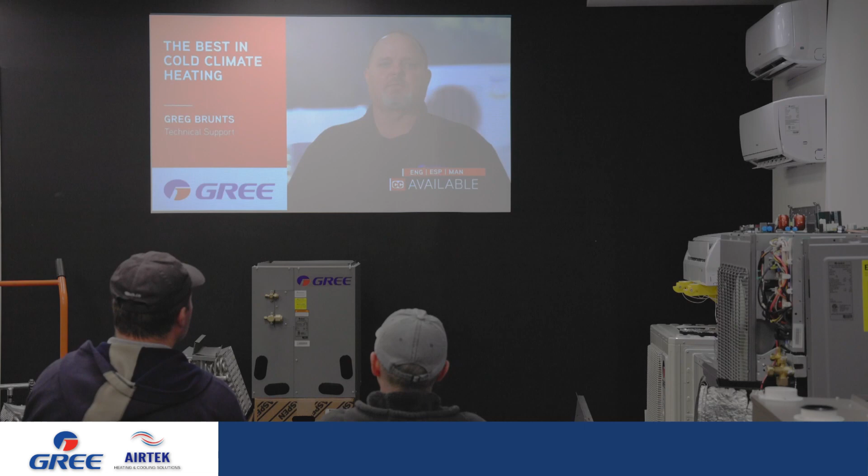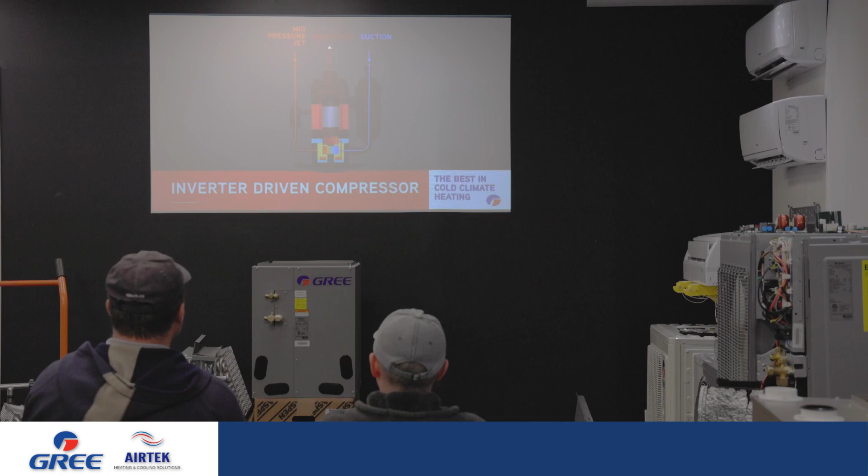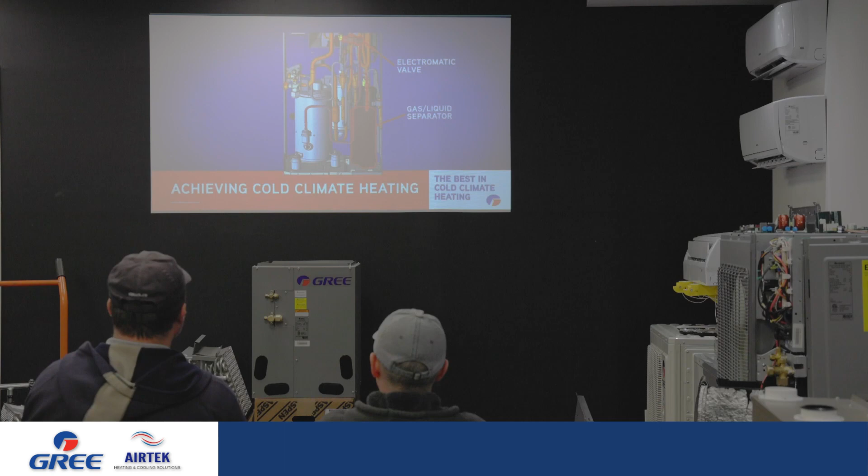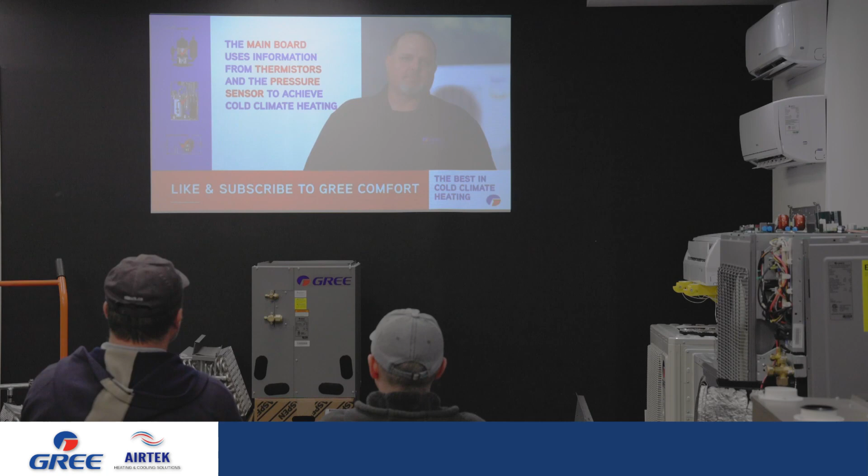Hello, Greg Brunts with Gree. Simply the best in cold climate heat. That's because Gree Flex and Multi-Pro use Ultra Heat technology that makes the unit a true cold climate heat pump. These units use a two-stage, two-cylinder enhanced vapor injection compressor that allows these units to heat effectively down to minus 22 degrees Fahrenheit. Gree Ultra units can go as low as minus 35 degrees Fahrenheit. The Ultra Heat compressor is a three-pipe compressor: a suction inlet, mid-pressure jet, and your discharge. A gas liquid separator and the electromagnetic valve allow refrigerant to flow into the mid-pressure jet of the compressor. In cold climate heating, the valve opens and refrigerant flows from the top of the gas liquid separator into the high-pressure cylinder, compressing the refrigerant a second time and increasing the discharge gas temperature. And this is what makes Gree simply the best in cold climate heating. With Gree, they're by your side.

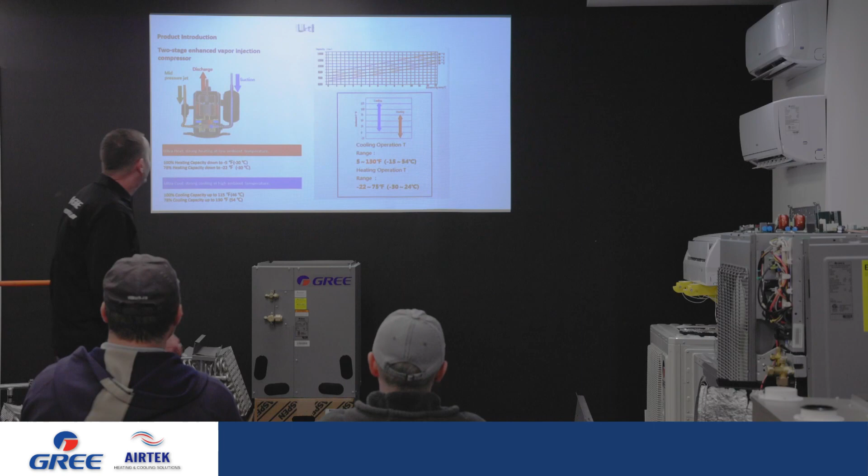So that's how our unit's small and compact. I don't know if you've worked with any other brands, but they're significantly larger, and on a cold day, they can get very, very noisy. Now, today we'll focus on our outdoor unit, whether it be 1.5 to 3 ton or 3.5 to 5 ton, matched with an indoor furnace with either our Gree coil or our Aspen coil.

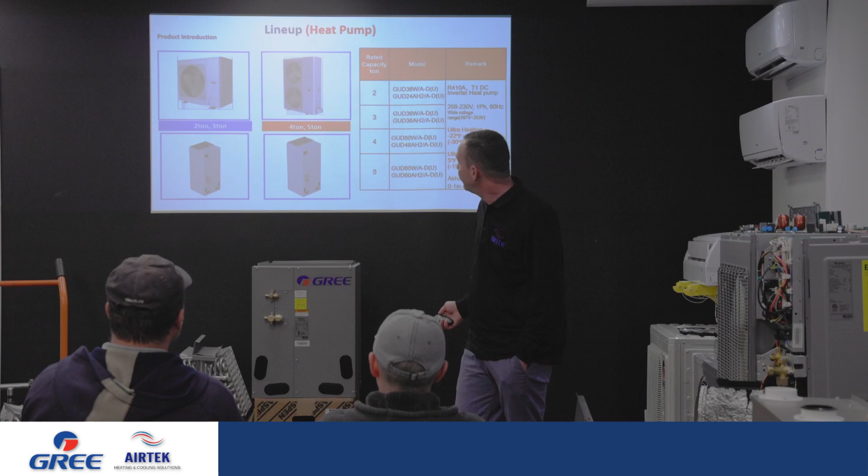Okay. Now the unit should be very quiet, as you see here, 2 to 3-ton, 52 decibels, my 5-ton model 58. This rings true all summer long, right through. It's just in the winter months that we might get a little louder than this, and that's during a defrost cycle.

So I'll say it a few times, but we would recommend to use a stand, not put the unit on wall brackets. Again, it's a very quiet unit, but on a cold day in the winter, there's going to be a handful of days that the customer won't appreciate that when the unit's going back and forth in defrost. So whenever you can put it on a stand, do so. Stay away from wall brackets.

Okay, our case coil here, really nice case coil. It's made to fit, this is my 1.5 to 3 ton right here. It's made to fit right on top of a Lennox 70, an American Standard, or a Trane.

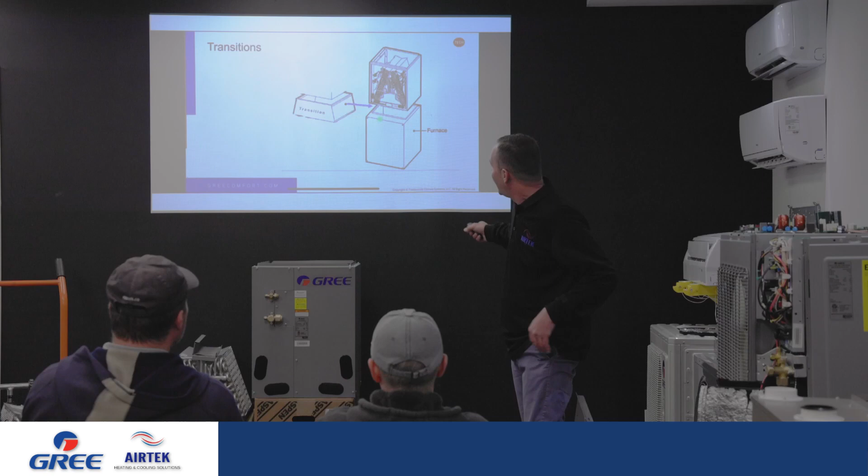60 to 80,000. We would like to see a transition, 8 to 10 inches ideally. If we were doing this, not only would we have more air for the heat to dissipate through the coil when the furnace is on, we'll also have an access point to inspect and clean the coil. We strongly recommend that. We do want to see some space between that coil and the furnace.

Do you sell them? Sorry, we do not. I'm looking for one. There was one recently on LinkedIn that had a built-in access door and everything, so I'm going to bring that to my boss's attention because I thought it was amazing. It was pre-made, heavy enough, solid enough metal to sit that coil on nicely. So I am looking for that, but in the meantime, try and make some type of a transition. I know it's an exact fit in a lot of cases, but we do want 8 to 10 inches.

Now, we need 5/16 access valves. I think that kind of rings true with just about any heat pump these days. We've been using them for ductless units for several years now.

What's nice about the Gree coil is I've got valves on the coil, the same valves as I have on the unit. So if we wanted to do our vacuum or anything of that nature, we can do everything in the basement where it's warm and dry.

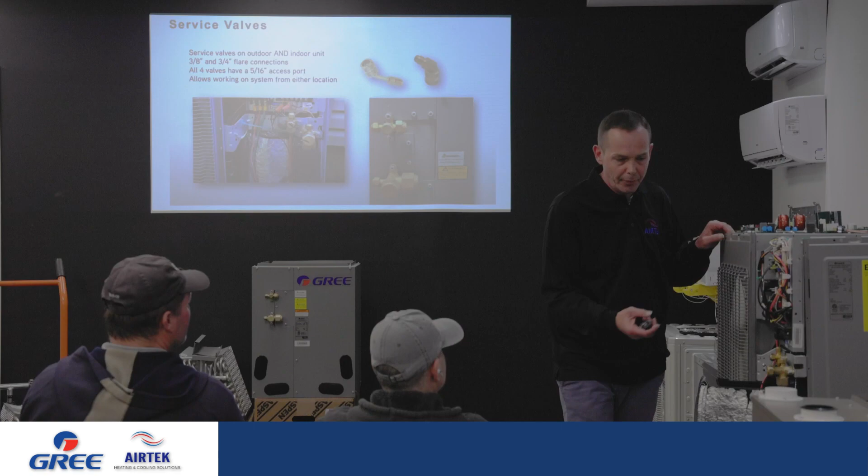So a complaint I get quite often on this unit, I really believe this is the best money can buy right now, but there are a few complaints I have as well. One, when I hook up my low voltage here, it's hard or impossible to hook my gauges up properly.

So one thing I learned from YouTube on it is if you unscrew these two screws here and pull them right out, you can actually move this out and connect your gauges. So that's one little secret. At the same time, another tip is just move inside. You've got all the same ports and access inside, so we can do everything inside we can do outside. Keep that in mind.

Now, we claim the Gree coil is multi-position. It is and it isn't. It can go horizontal left and right, and it can go upflow. For a downflow application, the Aspen is approved for downflow.

So I don't know if anybody installed an Aspen coil, but the 2 sheets of metal in the bottom of the box, we just chuck them in the garbage normally. Those are for downflow applications. Those 2 strips of metal go on either side of the coil in the pan, and what they are is splash guards ultimately. One will sit on each side, it's just a splash guard. We can do downflow applications with the Aspen coil, it's approved for that.

Well, this would work, but it doesn't have the approval, so if we were doing a downflow, I'd strongly suggest we use the Aspen simply because it has the approval rating for downflow.

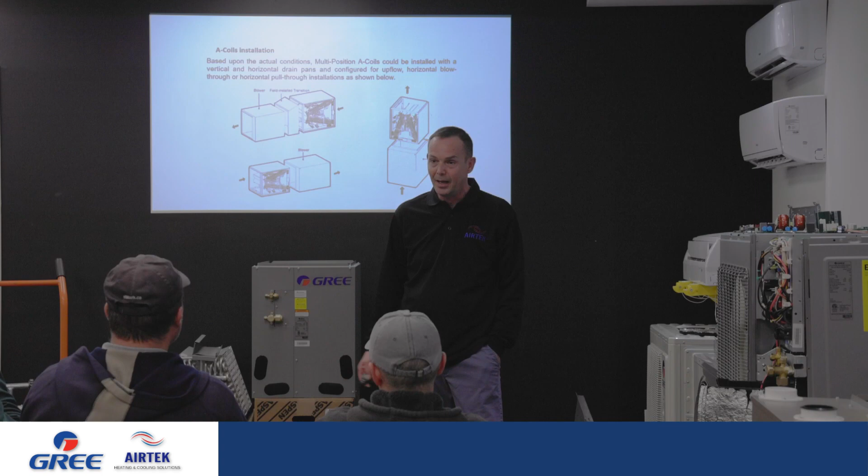We'd ask you to go out and look at it. If you do see it's defective, take a picture. We'll give you a pan and we'll set you up. Again, we've only seen 2 to date, but proactively we thought it better be safe than sorry, so we can keep everyone happy.

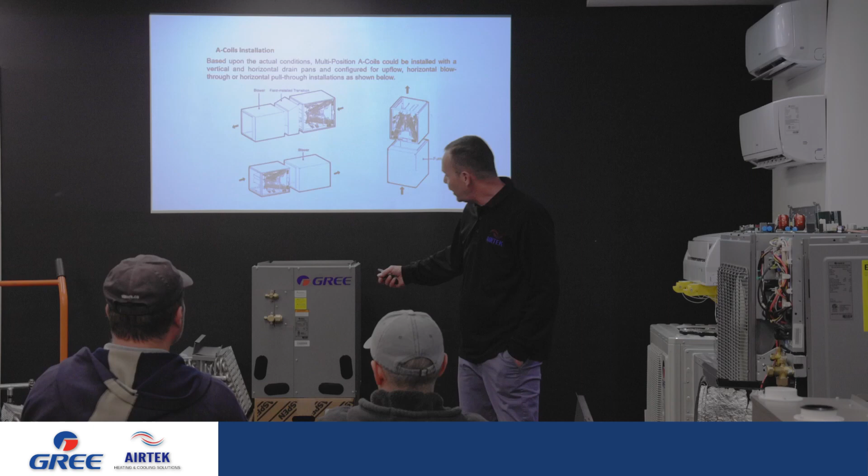Again, before you leave, at the end we'll actually take the pan out of this and swap it for a black one, and you'll see it's really not difficult to do. I've done 3 in place, meaning the gas was connected. I didn't relieve any gas, I did it in place. So we'll show you how to do that.

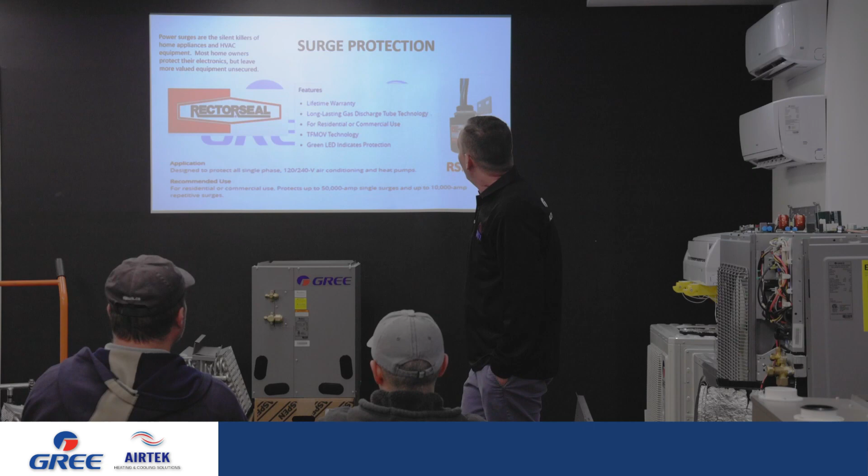A little on surge protectors here. We believe in surge protectors. Based on my data, I've shown it to my boss and the tech team, and we truly believe in these. When you buy a new TV, they generally sell you on a power bar with a built-in surge protector. We find that these really protect our unit, so when lightning strikes, this gets the brunt of it, not my unit.

Has anybody ever seen wires melted from the disconnect box, or from the compressor, from the unit right to the compressor? If one of these was on there, it wouldn't happen. Ants get into disconnect boxes, you get an ant across both line 1 and line 2, and we get too much voltage and the component fries.

This is sacrificial, it's about $90. We believe in it so much we're almost ready to add another year to the warranty. Our warranty is 10 years when you register and buy the unit from Airtek. If your compressor fails in that period, we give you a new unit.

Now let's get into that a little bit. That's assuming you install it properly. So today we'll go over it - it requires a 3/4 line set, so 3/4 or larger would be okay. But if we went out and looked at it and you had a 5/8, or if you didn't use number 10 wire, you skimped on the wire and it wasn't to code, then ultimately we would only give you a compressor. But if you've done everything properly and you have a compressor failure, we give you a brand new unit.

A lot of people say that, we actually do it. But again, we do believe in these, and they're not hard to install. I'll just quickly show you.

This one in particular, if you use a different one, you want to look at the instructions, but this is very easy to install. We have our line come from the box to a line, and from here we go to load, so we just connect to our load. So right where we're going from the disconnect box to the unit, we connect the same way.

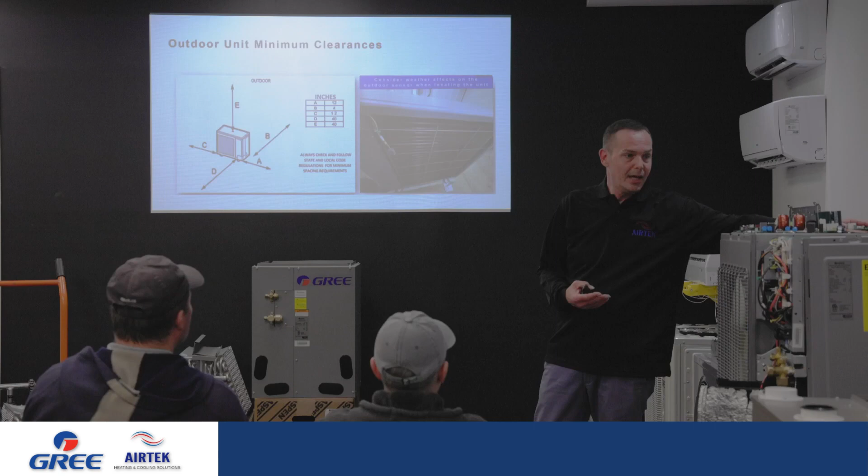Just keep in mind if you're doing that, we want to be able to get a hose behind the unit to clean it. A foot on either side - a foot is really important over here if we ever wanted to inspect a reversing valve.

There's a door here. This door comes right off, so we want a foot of clearance here, 100%. Out the front, we need 40 inches.

Be wary of chain link fences. In the summer they're fine, but I have seen chain link fences turn into ice. Remember, this is cold air and water that's blowing. Depending on how close it is, I'm not a scientist by any means, but I have seen them freeze up, so just be careful of chain link fences.

40 inches is what we want to see for clearance. Now, if 2 of these units were together, it's a 12-speed motor, so if they were too close, one could ultimately burn the other one out on the first speed. So 40 inches is important.

Now, we're working on getting baffles. For example, if you were putting this on a roof, I'd like to see you use a baffle. I'd like to see the wind hit the coil side, not the fan side, so do a little research. We put a baffle on, or I'd suggest putting one on, if I couldn't make the clearance—maybe there was too narrow of a townhouse complex. I haven't seen one that narrow yet, but it's possible. What it does is it reduces the clearance needed.

The 4 screws come off the existing grill. The new grill has a flat front and is open at the bottom and top, so it's redirecting the air. We don't want to say no, we can do that.

Above the unit, surprisingly, they want 40 inches. I don't know why—I've changed every component with 18 inches above, and most everything comes out here anyway. But keep in mind, if you're putting it under a deck, it won't affect operation, but the code or instruction manual says 40 inches above. I'm just putting that out there.

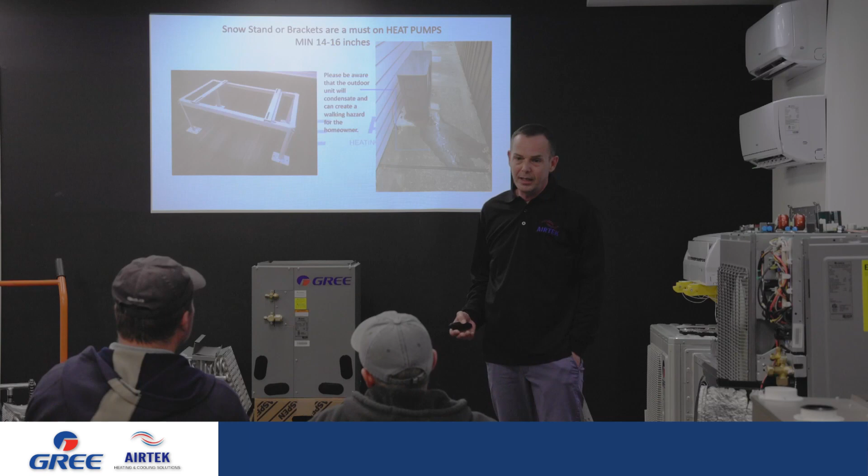All right, stands. Stands are really, really important, again, for noise especially. We'll get into line set lengths and what we've learned over the last year on how to make the unit quieter and keep it within the decibel rating it should be. But I can't stress enough, put it on a stand.

There's going to be a handful of days in the winter when it's on defrost that the unit can get a little louder than it should—not necessarily should, but it's working, and it's very cold outside. Mine at home in December and January was making some noise during defrost. It's quiet again now. On those cold days, it will happen.

The units condensate, and this one's not on a stand. That's not really why I'm showing you the picture—I'm showing you the picture to show you the amount of condensate here, so much so that I couldn't service my unit at home in the wintertime.

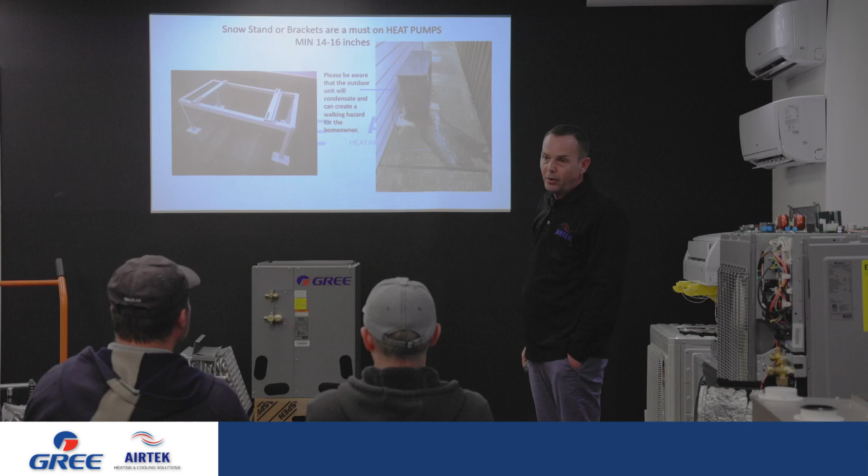That's normal operation. So if a unit's at the front of somebody's house, you might want to tell them, hey, this is not an air conditioner, it's going to work year-round, and somebody's going to slip and fall. I would go as far as writing on my invoice if they didn't want to move it: this is a possible slip and fall hazard, customer to make revisions. Just tell them about it at least, and if they don't move it, they don't believe you.

I'm going to show you how to do a pump down shortly, so we can do a pump down in the summertime and charge, and we'll move it to the backyard. There's always money to be made.

As far as power into the unit, there aren't too many people here, I can have you come up. I'll pass the boards around first here anyway. This is my main control board here, so here's where I'm going to see fault codes. I'll just pass that around instead of pointing at the unit itself. Power comes into the unit just below the main board—you would assume that it's feeding the main board.

It's not. What happens is this board here cleans and filters the power and converts it to DC. That board's actually placed right behind the main board. So again, it's not feeding the main board—it gets cleaned and filtered, then it goes to our drive board. This board here, all its duty is to control the compressor. We'll get into it after. When we're changing this board, thermal paste is required, and there are 4 screws that have to be properly inserted and tightened. We can't leave one screw out, otherwise we'll get a fault code on this, even if we just changed it.

I'll get more into detail shortly, but that's our drive board. All that does is control the compressor.

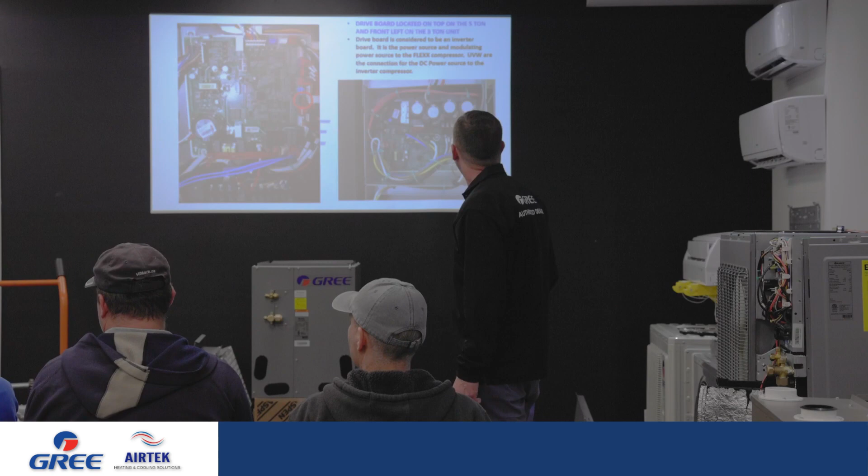Okay, forced operation. We're in the process of hooking this up. By the next time you come out, we should have this ready to go. We're going to have some guys come by in the next week or two, pipe it, and then we'll be able to power it up and physically show you on the control board.

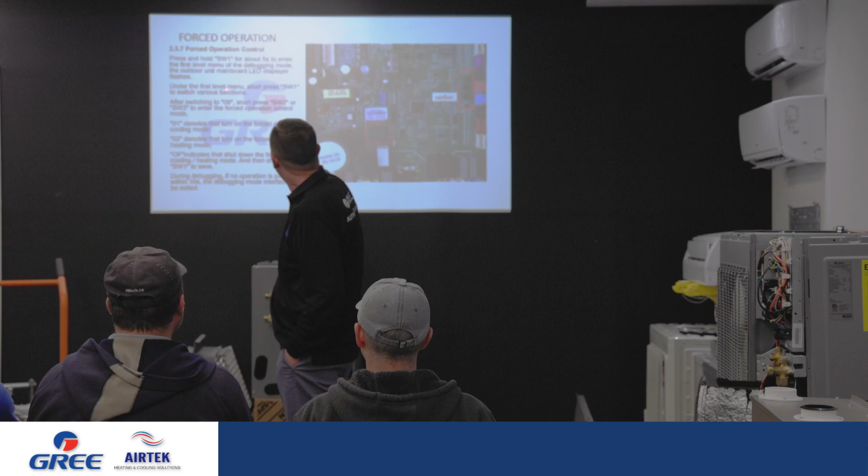So we don't have a contactor, but we can do more than we could have done when we did have one. Through these 3 buttons, 1, 2, 3 - 1 is at the bottom, 3 is at the top - we can get into cooling or heating mode. I'll walk you right through pump down, it seems to be the most popular.

So again, this is where, let's say we had a leak, or they didn't like the location of the unit, we can do pump down. We don't have to pull the contactor in, there isn't one. Cooling mode you can try, but you might go off on low pressure, so you may not get all the gas. This is the best way to do it, okay? It's just like holding in the contactor like we used to.

So through these 3 buttons, we're going to press and hold switch 1 for several seconds. Ultimately this is going to start to flash, and you're going to go through until you see 08. Once you see 08, you can hit switch 2 or 3 to enter pump down mode. Then we hit switch 1, and the unit's going to come on in pump down mode.

What I'd ask you to do at that point is, it's not magic, we have to manually shut our 3/8 valve. You can either hook your gauges up, or I'm able to go off sound, either way. Once all the gas gets back to the compressor, just like we used to, we're going to close off the other valve.

Okay? At that point, in all honesty, I'm gonna ask you to turn the power off so the system shuts down. Okay, I don't have any other instruction on how to shut it off, so truthfully, just turn the power off, we can turn it back on again once it's moved. So you can actually just hit the SW2 or 3 back to the off position.

Will it? Okay, very good. So I couldn't get that far. I've done one, but I couldn't get it to shut off, so thank you. So instead of shutting the power off, you can actually go back into the menu. Thank you, buddy, it's good having you here. And hit switch 2 or 3, and you can get back in. And then you just go to the off. As long as you leave it there, it'll turn off. Very good. Or just hit the power off, either one. Very good.

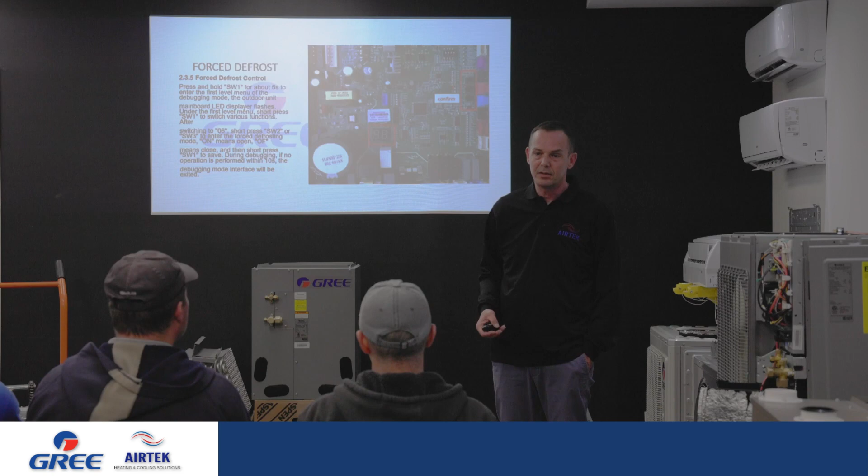It lasts 2 to 3 minutes. And it doesn't affect the thermostat even a half degree. So it's very minimal and it's not cold air. So I would say don't worry about it. I'll talk about it again when we get to the wiring, but I wouldn't worry about running an extra wire for defrost. It's not necessary. Again, it's ineffective when you think about how long the furnace takes to kick on, and defrost only being 3 minutes, you're doing it in vain.

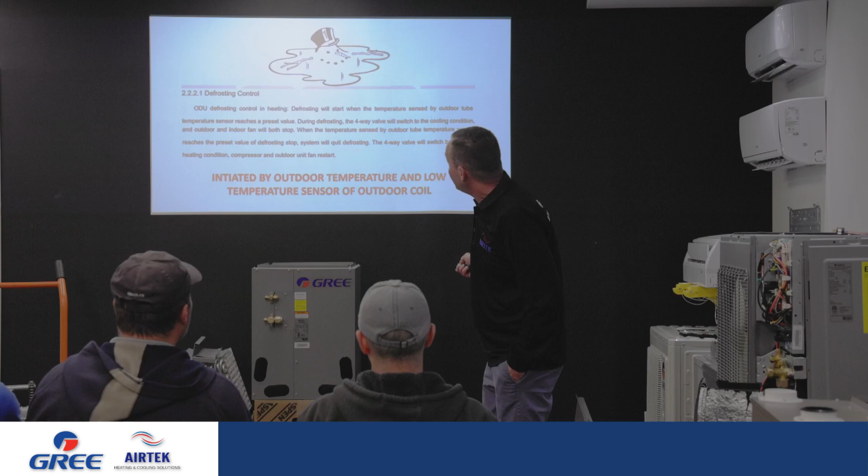So defrost, again, it's not controlled by the thermostat, it's not controlled by a timer, it's done in real time on this machine, which is pretty cool. So there's 4 sensors. There's a heat exchanger temperature sensor, our outdoor sensor. This one is the one I showed you in the picture at the beginning where they had the vent pointed right at it. We want to be at least a foot away with our venting. Dryer vents as well in the back, a foot would be okay, but 3 feet would be ideal.

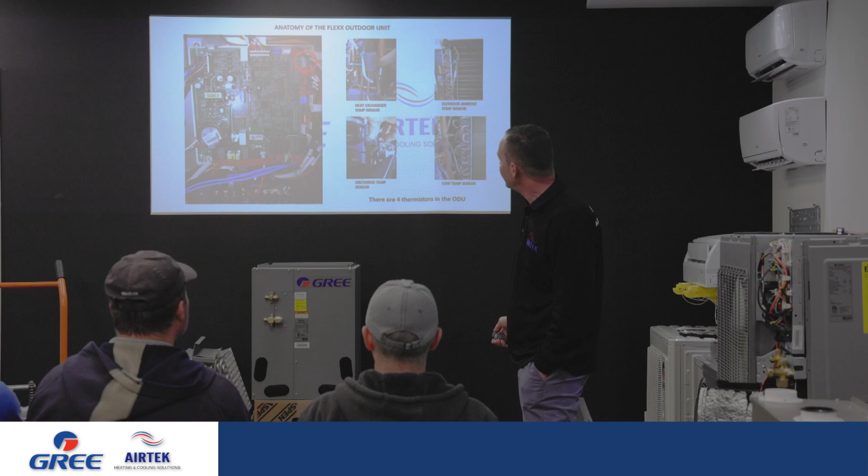If we had a dryer vent back there, when you walk by in the winter, all the snow's melted, it could cause issues with defrost, especially if it's at the rear of the unit, my sensor's right in the back. So try to stay 3 feet away from a dryer. Discharge temperature sensor, a low temperature sensor. So there's 4 in total. What's really cool is I've only ever seen one fail. And I got either an F2, an F3, or an F4 code.

Okay, so F2, in case you can't see, is condenser temperature sensor error. F3 is outdoor ambient temperature sensor error. F4 is the discharge temperature sensor error. One of those sensors failed, so it gave me a code for which one had failed. However, my replacement part has got 3 all on one sensor. So it's one harness and all 3 connect to it. So it's kind of cool. When I see an F2, 3, or 4, it's very accurate. One of those sensors has failed. Again, I've only seen this happen once.

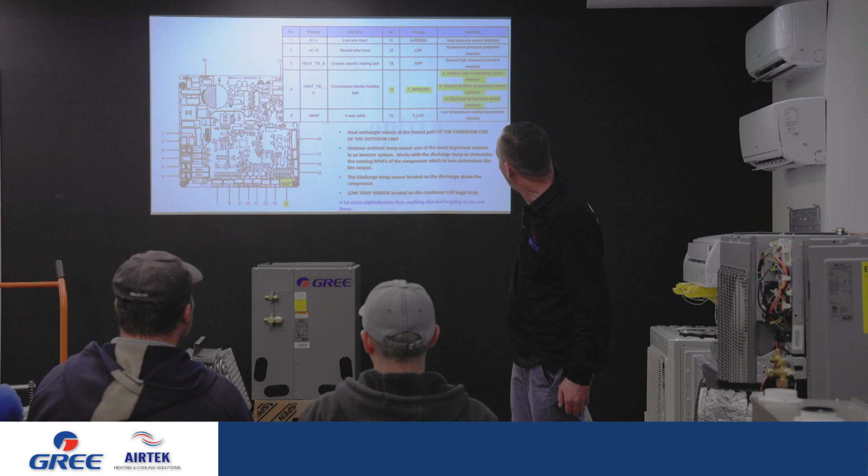Well, if it does fail, we could either take it off. So the plug, this is out of my service manual, by the way. I'm going to send this to everybody. But here I'm able to say it's number 14. Sensor right there. 2, 3, 4, I know exactly which sensors they are. So that is right here on the board.

Right at the top here. So we could either take that out, ohm it out. We only have to find a problem with one of them. Again, they're all together on one harness, so it's a fairly easy fix. We'll pull that off, and there's maybe 6 tie wraps, unfortunately. We have to go through and run each wire back again, but it's a simple fix.

Has anybody installed any of these and had any problems at all? Okay, same thing, but what kind of problems have you experienced, out of curiosity? We're getting into line sets and noise, so we're getting there, but I'd be interested. First time I installed it, I forgot to open the valves. Okay, did you get an H4 code? Did you get a code? Did an H4 overload?

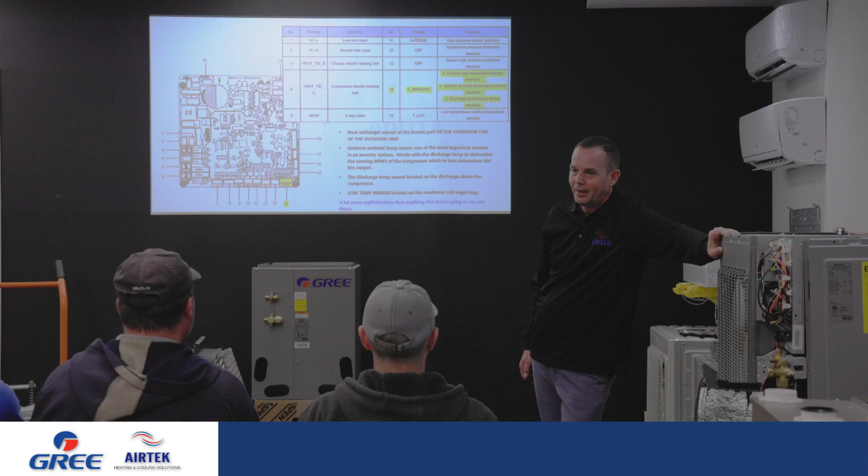There was low pressure. Okay, E3, that would be E3. So when you found it low pressure, you kept adding gas and then found out that you had one of the valves closed? I had like 50 grams, the same, low pressure. What's going on? I added a little more, nothing changed, and I went inside. Valves were closed. Right, okay, well, good, at least you figured it out.

Very good. Okay, something really cool about this unit, and it does set us apart from our competitors: we don't have to insulate the 3/8. The reason for that is I've got a TX valve in the unit, and I've got another TX valve on my coil. So we have total control. A lot of our competitors don't have that.

So much so I had a guy installing a unit across the street from a lady, and she had a different brand that had to be insulated. I had to send them a picture of this so that she could comprehend that it didn't have to be done. So this is a big deal for me because now I can reuse line sets. I don't have to fight insulation in the ceiling, and I don't have to insulate it. So that's a selling feature for us as the installer and the serviceman.

What's really cool as well is 1.5 to 3 ton, 3.5 to 5 ton, it doesn't matter. It's 3/8, 3/4 for up to 100 feet of line set. We don't have to increase pipe size. I've installed 5 tons before that were 1 1/8. You couldn't bend it, you had to buy elbows. You couldn't bend it without kinking it. It was a disaster. It cost me a fortune. It was a nightmare. I can run 3/4 for 100 feet with this machine.

Really nice. Now, when we add gas, this is a little different than an air conditioner. We can't gas and go off pressures, okay? It's really off of the charge. The unit comes pre-charged with 25 feet. If you use an Aspen coil, it's just nitrogen. But if you buy the unit, 25 feet's in here, my case coil has another 6 feet. So now I've got a 31-foot charge. In actuality, you'll get away with 35 feet. So after 35 feet, we need a scale, and we need to weigh 0.32 ounces in.

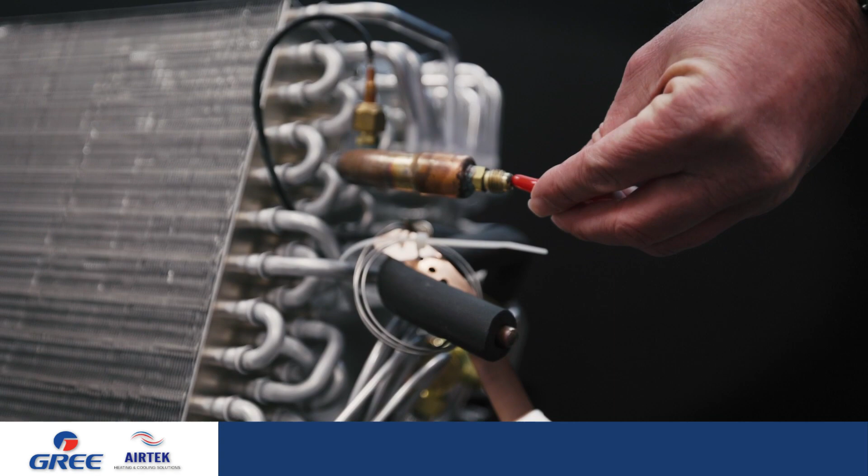Okay, so you say there's nitrogen inside? No, there's no R410 refrigerant in here. There's nitrogen in here. So if you ever buy one of these coils, and I will say, if everybody's familiar with the hiss test, when you buy an Aspen coil from us, just pull off this little tab here and push the Schrader. You should hear a good charge of gas. If you don't hear any gas, or if you don't think it's enough gas, you can return it to us, no question. So I'd say do that before you even leave. We'd rather see you do it once and do it right than come back with a leaky coil. It doesn't help anybody involved.

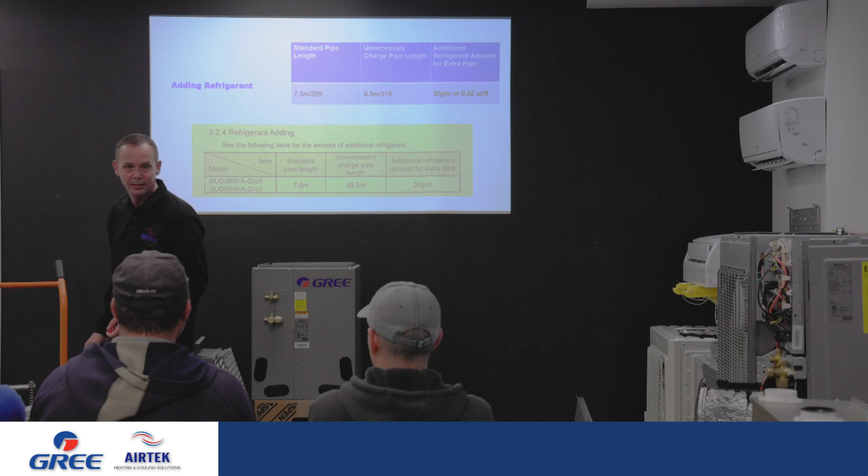Okay, so again, I can't stress enough. We'll get into it more when we get into more service stuff or fault codes. You need a scale and you need a reclaim tank. It's very important. We can't go off pressures. I had a guy last week, he was at a job and he had the H4 code. I tell him to take 5 ounces out, and he says, I don't have a scale, I don't have a reclaim tank. So I didn't encourage it, but he's got his hose there and he's asking me, well, how long do you think 5 ounces is?

I'm saying, holy shit. That wasn't a good thing what he did. It was wrong on many levels, but here's the kicker. He doesn't know what he took out now. So come next season, he may have screwed the charge. You know what I'm saying? Weight is very, very important here. For example, if you had a leak and it was a large enough leak, we can't go by pressures. I'd tell you, all right, let's take all the gas out, let's weigh it all back in again. It's that critical with this. So everybody needs a reclaim tank and a scale. It's part of our job now.

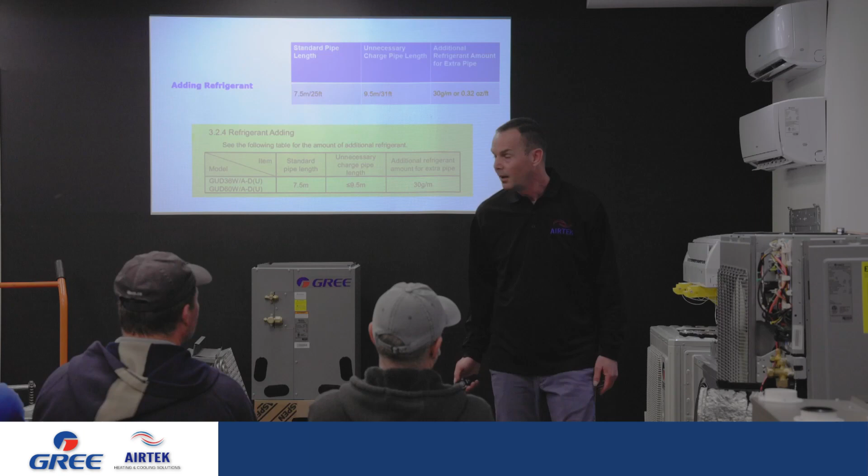Now, with all the new gas coming, this kind of works too. Everybody's starting to become afraid to weld with the new gas that's flammable. Thankfully, we're not there yet with our unit, but it's coming. So we sell a 3/4 copper flexible connection off the top here. It's about $40. These are what I wanted to show you. These are ProFit fittings. There's a few different wholesalers selling these in Toronto. They're not new; they've been used in the States for some time. What's really cool about this one, it's a pre-manufactured flare. It's a brass fitting, made to go right up to your flare. Just like a SharkBite for the water, you just pop your connection in. That we sell for about $20, just to give you an idea.

No leaks. We haven't had any problems. Again, they've been used in the States for years. I don't know how long they've been in Canada, but we've been selling them all summer long. I haven't had one person come back. I've been to some other wholesalers, and they have a big display at one, and they're selling them like they're going out of style. We just brought this in as well. We were at the show in Chicago.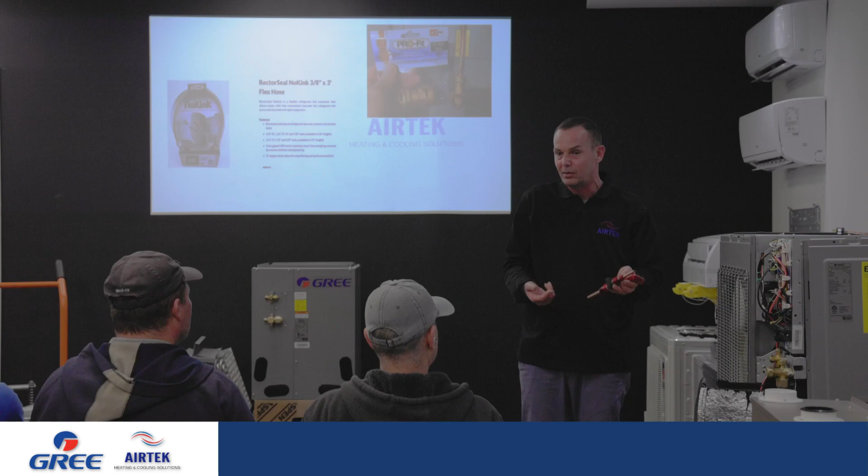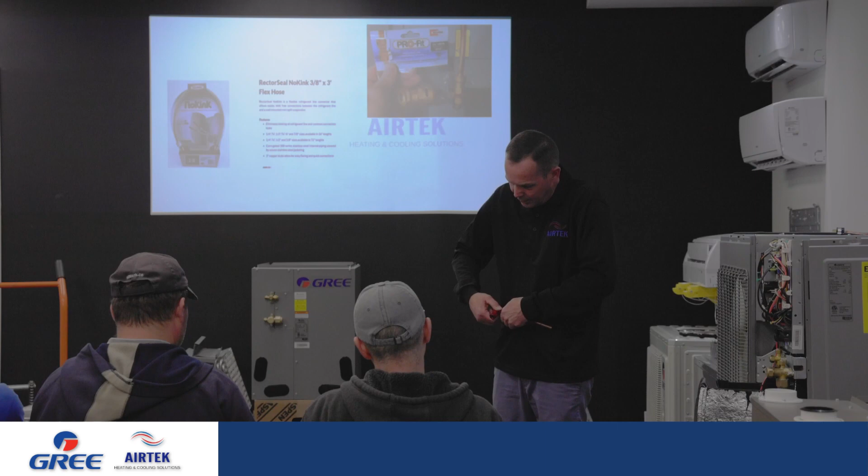With these we don't have to solder, okay? The reason we don't want you to solder is if we get a small little piece, this isn't an air conditioner where we can just go and blow everything out. I wish it was, but it's not. If I got a piece of debris stuck in here, worst case scenario, I'd be forcing the unit into operation, going through with a temperature probe, trying to find where that piece of dirt is stuck. So if you're a professional at welding and you're running nitrogen, go ahead, but personally, I'm using these fittings now myself. Mind you, I know how to make a flare, so if you can make a flare, just make flares, but these are to make our lives easier. These are another style of fitting that's braze-free.

Why I like this in particular is we're still going to do ACs this summer, so the rebate, to my understanding, is going to happen again in June. It's going to be used as an election tool, so we're going to be waiting a little while. So ACs are still going to be happening this summer. So most ACs are swedged, right?

I'm already to the point where I don't have my torches anymore, so I'm not using my torch anymore. That fitting goes right over top of it. It's made for it. See how it was swedged, right? Taking this up with 2 wrenches. I'll do the same on the other end with my pipe. I didn't have to weld right off the unit.

No, 3/8, 3/4. Did we bring 7/8? I'll ask Sagar in a minute. I know I have 3/4 and 3/8 because our units take it. We might have gone as far as bringing in 7/8 as well. I'll pass that around so you can play around, see how they work. These are going to be becoming more and more popular, including the press fittings. As this new refrigerant comes out, everybody's really scared to weld and afraid they're going to have some type of problem.

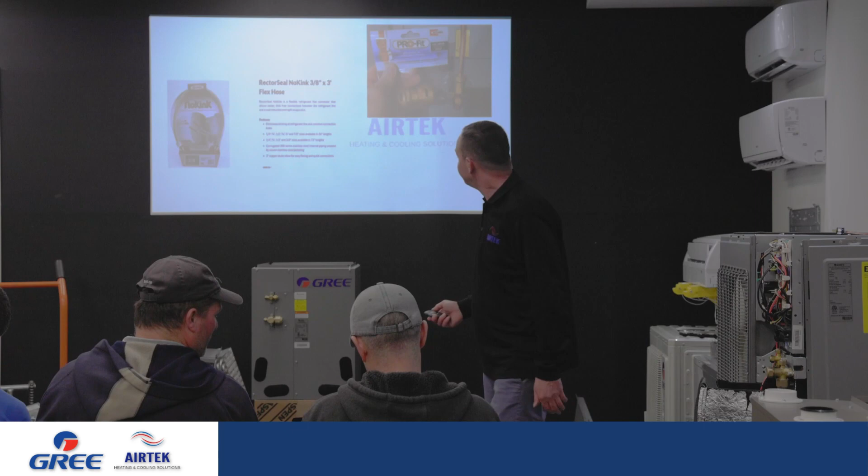Okay, flaring. It really is important. Leaks don't just happen. We need to know how to use a flaring tool. If you don't, I encourage you to practice on the weekend. I have this flaring tool here. Best flaring tool I've ever had. It's easy to find 3/4, 3/8, and when I get close, it just seems to pull right in. But it has a ratchet. The ratchet stops, so I don't over tighten it. It's the best flaring tool I think money can buy.

However, I hear from all these guys coming to these classes all the time that they're having leaks. I don't sell this. This is just to help you guys. I've seen this in action. I was in Ottawa, and what sold me on it is he made a flare in a space this size. And I'm saying, well, I could have done that with my flaring tool, but he did it very quickly and effectively, and the flare was perfect. This makes a perfect flare every time. I hear that's a good price, so if you ordered that today, you can probably have it tomorrow from Amazon. But that makes a perfect flare every time.

Have you used that? Seen it in action. Okay, so I personally believe in this, but with the amount of people I hear with leaks, I strongly encourage your company to buy maybe one and pass it around, use it. But guys that are using this don't have leaks and they're very comfortable using it.

Torque wrench. I happened to pick one up. I'm always a believer in over tightening. I was Mr. Pipe. My picture's really on the wall at Enbridge somewhere before they kept changing their name, Mr. Pipe. And I used to do probably 8 sets of flares a day. I had a leak once, and it was outside. I'd gone there on a service call actually because the lines were filling up with water because it kept going in and out of the building, many times anyway. So there was condensation, hot and cold, hot and cold.

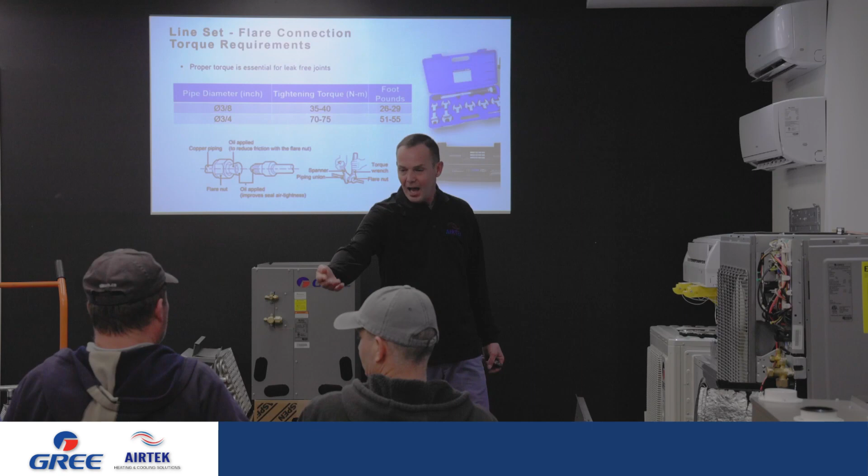When I come to the first job site visit with you, I'll probably have my laptop to set it up, and you'll hear the customer think very highly of that laptop. It takes me to another level. Having a tool like this, where it vibrates and lights up when it's tight, takes you to another level too when somebody's watching you. They've never seen anybody use this before, and they're interested. It takes you up a little bit.

It also gives you peace of mind that you're not gonna have a leak. The one leak I had was back when I was over-tightening things. If I had this, I wouldn't have had that problem. It was outside and temperature that caused the leak. Think about it: this is heating to 100 degrees Fahrenheit outside in freezing temperatures. The potential's there for a crack, right? So that's more reason to use this.

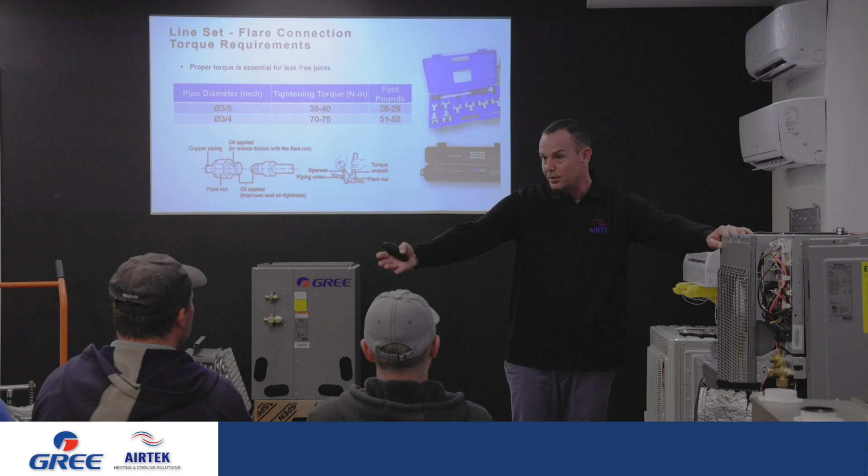We don't want to see any of this stuff. If your flare is bad, it's going to leak. None of this is a Band-Aid solution, it's going to be a problem, and you've got the potential now of contaminating the unit. We don't want to contaminate this unit again. If we went around, worst case we'd have to force operation and go through with a temperature probe to try and find where there was a piece of debris stuck. It would be very tedious. I'd consider resigning it, it could be a hell of a job, honestly. So we don't want to see any of this crap, please.

If you really want to use something as a sealant on your flare, the only thing we'd suggest would be PVE oil. It's funny, Sagar picked up a jug of this and it was $80 or $90. Holy shit, I think it's a waste personally, but we bought it just to try it out. This is all we want to see, none of this other stuff at all. If you really think you want some sealant on your flare, just PVE oil and that's it.

Filter dryers, we don't want them. I'm not the police, so on the next slide I'll just say, if you really want to have it, you can have it. It's your job, not mine, but myself, as well as Gree the factory, says don't do it. There are filters built into this unit already, before and after major components. We feel this could be too much restriction. Again, I'm not the police, it's your job. If you think you need one, by all means, and if it comes to it, eventually we might tell you to take it off.

However, is anybody reusing line sets with air conditioners? I'm sure we are. Heat pumps would be great to run a new line every time, but we don't always have that capability, so reusing a line set is fine. I personally only use nitrogen. When the transition from R22 to R410 happened, I called all the different manufacturers, Yellow Jacket, JB, and they told me it doesn't matter, such a small fraction of an amount. So that being the case, nitrogen has been great for me. If you were using chemicals, that's fine, continue doing what you're doing, but you can reuse a line set, that's all I'm trying to stress here. We can reuse a line set.

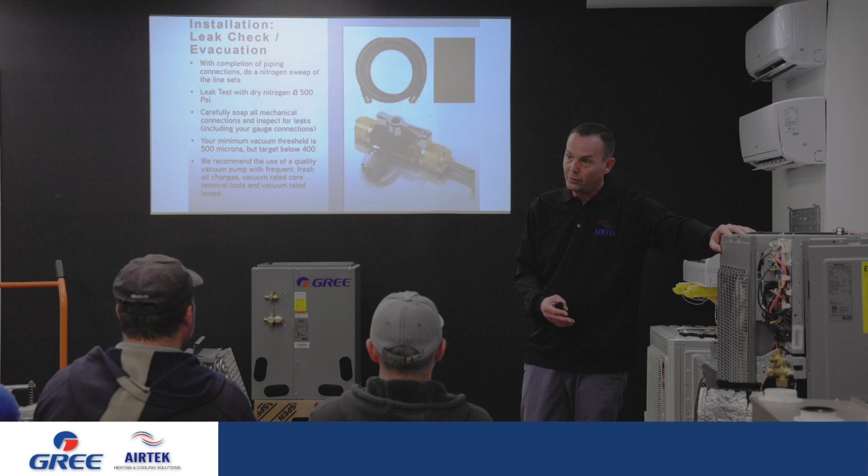Okay, but we'd really like to see you hook your micron gauge up to about 400 microns. In the manual, I was kind of surprised—it tells me that for this unit I should vacuum for 35 minutes. I don't know how they get it based on time. And on the 4 or 5 ton model, 45 minutes. I thought that was strange.

But what you do need to know is, again, these are not interconnected. So when you're doing a vacuum, we can't just vacuum like we used to off the 3/8 only. We need to do them separately, or we can put a T and do them together, but these are not connected.

So when you're doing your vacuum, remember to do both sides. I just don't see anybody freaking out, but I had one guy, and he had no idea, and he'd been installing it for who knows how long. I'm thinking, holy shit, right? Yeah, hopefully he didn't buy my unit.

Oh, God. What thermostats are you guys using right now? Ecobee? Okay, so Ecobee is our preferred thermostat. It seems to be trouble-free. Their tech support is second to none as well.

You can get them at 9, 10 o'clock. A little tip, if you do get through, 9 out of 10 are good. The one person is crap on tech support, so if you get a crappy guy, my advice is just end the call somehow, then call back in and start a fresh call. It's the best, otherwise you're stuck with an idiot, unfortunately. I mean, most of them are really good, but occasionally you get somebody who has no idea. He's the beginner guy that, I guess, is filling in, he's got the homeowner line, and he's doing the tech line anyway. Hang up, call back in again, save yourself a lot of time.

You can use the older style thermostats. It's hard to see, but there is emergency heat here and here. Problem with that is now you're going to have to run an outdoor temperature sensor. So you've got more wiring, and the setup on these is a little more involved—it's not quick and easy like this. You're going through a little menu of maybe 30, 40 parameters that you have to set. So it's not fun, but you can do it. These will work, there's just more work involved. Big thing is you have to buy a temperature sensor and get it to the outside. That's why we encourage the Ecobee.

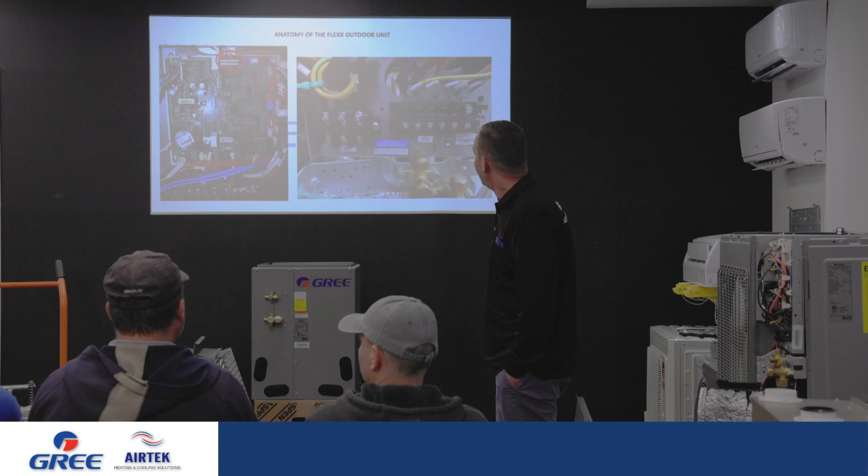Okay, here's my wiring diagram for the Ecobee with our machine. Now if you'll notice, my furnace from my thermostat, I've only got 1, 2, 3, 4, 5 wires.

Reason I did it like this is a lot of furnaces don't have B, and there's some furnaces that we have to cut or do jumpers on the control board to activate B properly or control B. So my advice to you is don't even use B. If you've already taken it to the furnace, or if it's already on a tap, just mirror them together. Forget about B on the furnace altogether.

What I did in this case is I ran 5 wires to the furnace from the thermostat, and then from the thermostat, this may save you some wiring or a Fast-Stat perhaps, B to right to the outdoor unit. That might save you a wire saver one day doing it like I did. It depends on where everything's placed, I know, but keep in mind I didn't have to pay extra money and use that Fast-Stat. I was able to run the wire. So I did it with the Ecobee 1 package.

Now D, we talked a little about D, so it is possible to run D to W. D is for defrost. W, obviously, on our furnace will bring our heat on. So that is doable, however, it's not realistic.

Again, my defrost is 2-3 minutes. So think about it: the unit gets the call, so from D it gets the call to W, the inducer motor comes on, checks the pressure switch, then it lights up. It might not even ignite before my heat pump comes back on. If so, it might have run for 1 minute if I was lucky. So there's no point. Is it actually 2-3 minutes? It is, it's a very short defrost time.

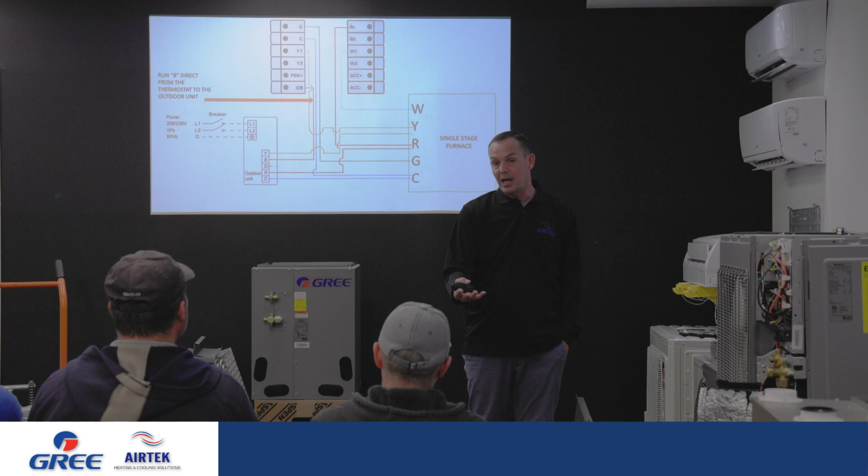But defrosting could happen 2-3 times in an hour, depending on how cold it is. So I personally, based on my own experience, it's lukewarm air, it's not cold air. It's 2-3 minutes, it's not gonna adjust the temperature of the house by half a degree. But you can do it if you feel you want to, by all means. Run your extra D wire, just connect it to W, and then you've got total control.

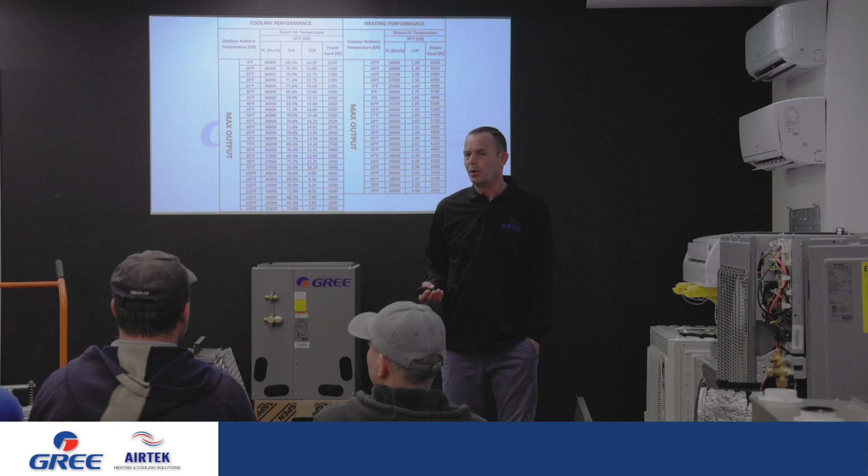What outdoor temperature are you guys setting your Ecobee up to switch over to the furnace at? Anybody? It's still 2 degrees. Okay, so -5 is the magic number. If somebody was to call me and say, I'll go -5. The unit works to -30. Keep that in mind, Celsius.

At home, I'll tell you a little about my experience. So my house, and I had to learn throughout all this - we're all learning right now. My house was built in 1980. The house is 1,800 square feet, maybe 1,900 square feet. I have a 60,000 furnace in there now. My air conditioner was 2-ton. So I put the 2-ton unit in and I set it up as 2-ton.

I did this in October, so I didn't really use the air conditioning. But I didn't connect my furnace again either, so I just was relying on the heat pump. Still today, my furnace isn't connected. It's only being used as an air handler for testing purposes.

So about December, my grandma's in the basement, and my kids too, so they were pissed. They're like, listen, it's not warm in here, it's uncomfortable. And the grandmother, her window's right outside the unit, and it's ramping up and down all the time. Shit, what am I gonna do here, right? So I thought about it and said, my furnace is a 60, it's capable of moving 3 tons of cooling.

So I ran outside, watched I didn't slip because it was icy, and I set the unit to 3-ton. Remember, it's a variable speed compressor, so it's going to be fine in the summertime. It's not going to ice up, it's not going to freeze up. My unit is capable and moves 3 tons of cooling already. So now, instead of having 24,000 BTU heating my house, I've got 36,000.

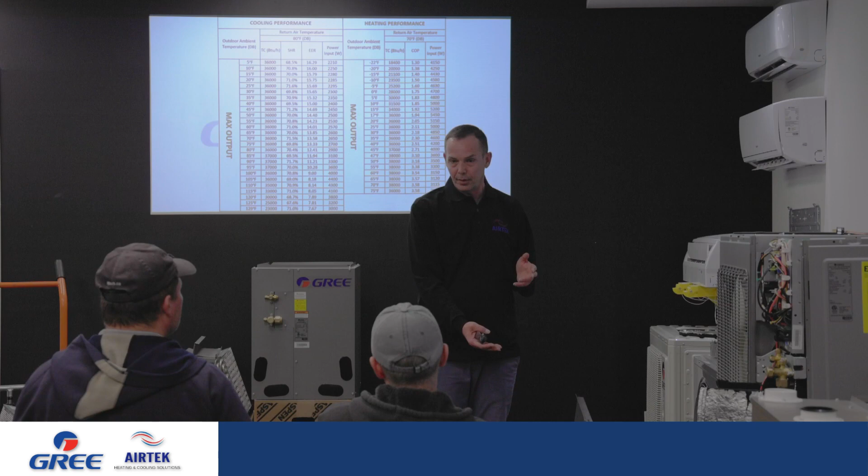After I was happy with things, I did a heat loss calculation. Remember, my house was built in 1980, it's about 1,800 square feet. Well, guess what? My house called for a 4-ton heat pump. So we kind of have to stop and think - I only had a 60,000 furnace. I didn't have dual return air or bottom return air for a 4-ton. My ductwork was probably too small, so I had to adapt the best I could.

So what I'm ultimately saying here is max this out for heating. It's a variable speed compressor, so in the summertime we're not going to have problems. If you've got at least a 60 furnace, you can move 3 tons, no problem. So we're really concerned about heat at this point - we want to make the customer happy. They want to use their heat pump and expect it to be like their furnace. It's not going to be, but in strong mode and maxed out, it's going to be as close as it possibly can to keep them comfortable. The difference in my house was night and day when I switched it over.

Dip switches, here we are. Big deal here - it's upside down. Best unit money can buy, I truly believe that, however the dip switches are upside down. We had a guy from the factory here watching one day, and he didn't think it was an issue. This place was packed, turned my computer upside down, everybody was scratching their heads, and they finally agreed they're going to try and revise this for us on the next edition. But it can get confusing, so really it seems easy, but just take a minute.

This is generally the end of the day, and the customer is asking if you're finished yet. You're telling the helper to clean up, everybody wants to leave, but this is important - most important thing in the job. What I'd suggest you do is turn the power off when you're setting the dip switches, okay? I had a guy set the dip switches with the power on, and if you don't recycle the power, it won't take effect. So unless the power failed, it wouldn't have taken effect. So your best bet is just turn the power off, then set the dip switches, okay?

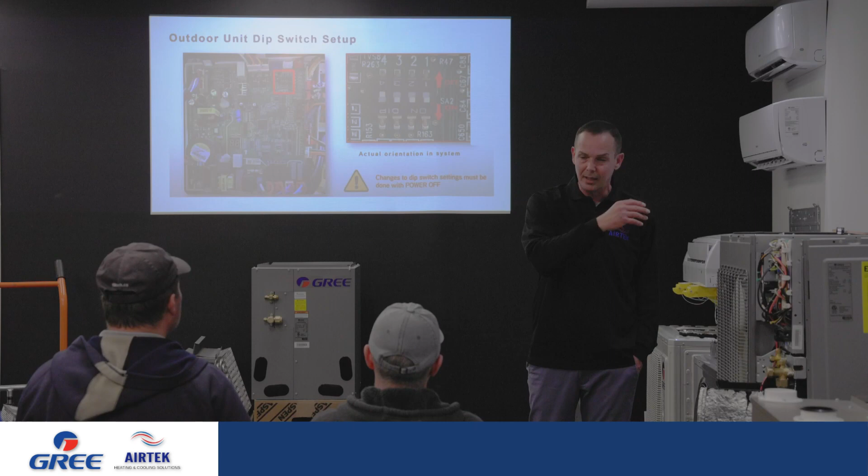So if you disconnect, pull it, shut the switch off, whatever it is, turn it off. Dip switch 1, keep in mind it's backwards, so it goes 4, 3, 2, 1. It's not like a book, it's upside down. Dip switch 1 is our tonnage. So if I wanted the unit to be 2 ton, dip switch 1 would be in the off position. If I wanted the unit to be 3 ton, dip switch 1 would be in the on position. Remember, it's upside down, so this is actually going to be up on the board. There's not a lot of guys, so I'll bring you up in a second and say, hey, pick one of these, and we'll set it together just so you get an idea of what's involved.

Dip switch 2 is the most important dip switch. If you've installed some other brand, did you get any phone calls about problems in the wintertime with it icing up and making noise? Yes? Okay, yeah, they're always far away too, yeah. So dip switch 2 out of the box is set to standard default. Wherever, maybe in China that'll work, but here it doesn't, okay? Our climates are much colder - you have to set strong defrost.

If it was only one thing you were gonna do, I'd say this is the most important thing here. It's gotta be in strong defrost, and if it isn't, I promise you, I'll bet money right now, you're gonna get a call next winter, and it's gonna look like that, okay? What happens when it isn't set properly is now the fan's going and going and going and fighting a big chunk of ice. Eventually your fan's gonna burn up, we're gonna get an H6 code for the fan. And if it doesn't happen right away, the fan gets weakened from this, and then a month later, you'll be back changing the fan. So all I can tell you is set dip switch 2 every time. If you're going back to jobs for summer maintenance or service calls, check the dip switches every time. Dip switch 2's gotta be in the on position. It's got to be. Thank you. The biggest phone call I got all winter, and you go and find out it's just that switch that caused it.

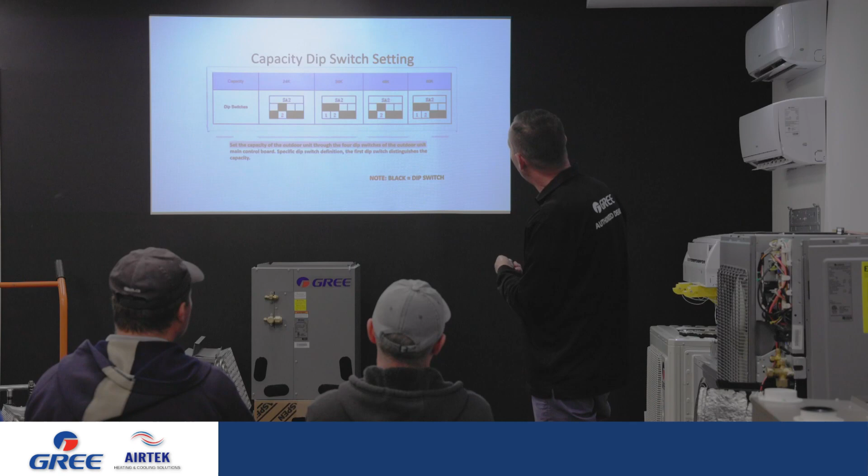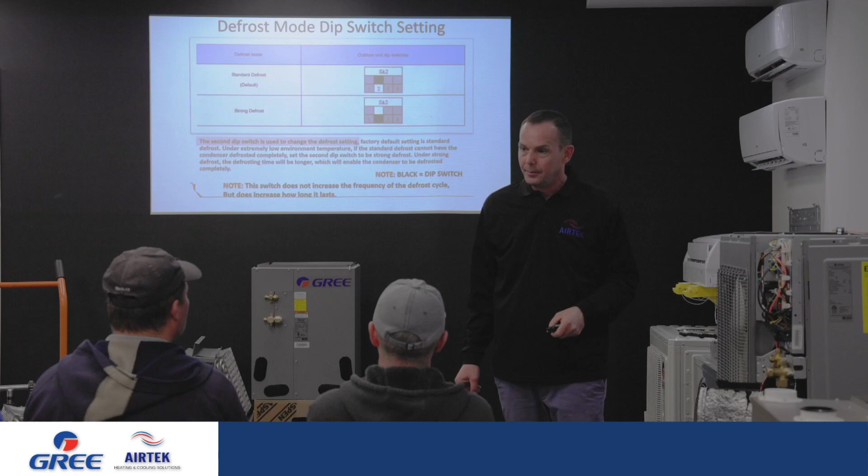So dip switch 1, I'm going to put in the on position. Crazy but true, on is down. Okay, and you'll see on the board it's upside down writing, but it does say on there. Okay. Dip switch 2 is going to be in the off position. Off is up on the control board. Okay. And we wanted to do a 2 1/2 ton. So we're gonna make it a 2.5, so we're gonna select energy saving mode.

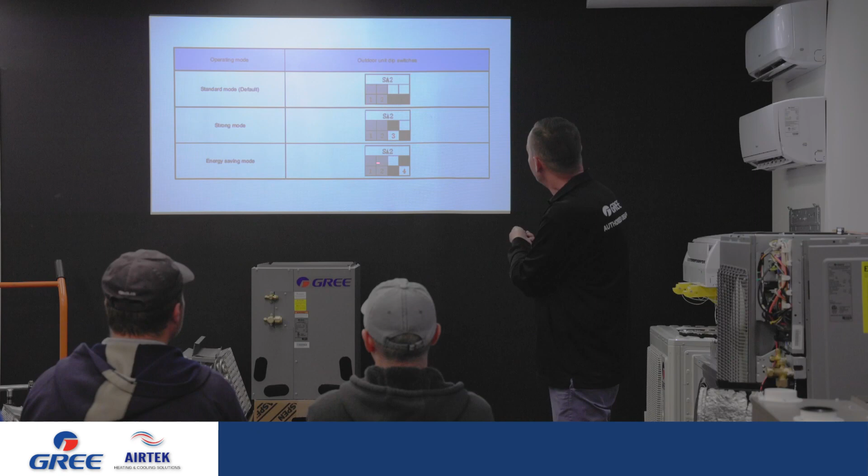You said number 2 is for strong defrost. Strong defrost, yes. Should be on. Strong defrost, it's going to be in the off position. Off position? Yes. Okay. So I'm saying, call me on one and we'll go and do it together, but you may want to take a picture after this one too. Okay, energy saving mode, so dip switch 3 is going to be off. 4 is going to be on. So I've set that up now as a 2.5 ton in strong defrost.

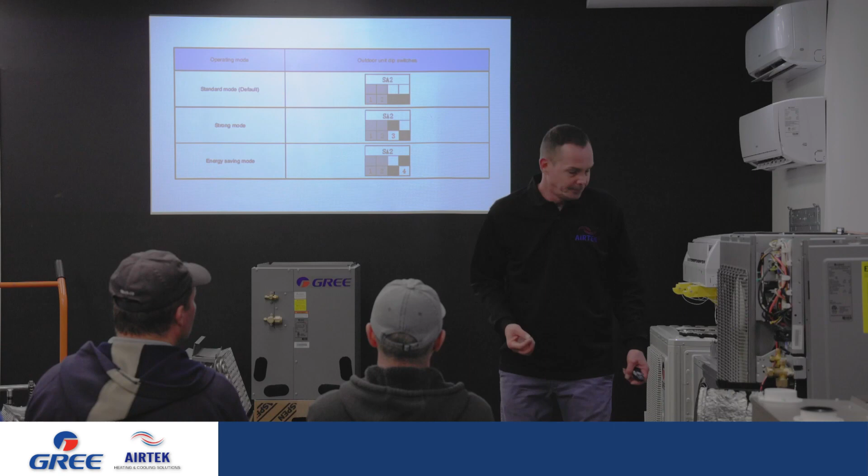Okay, now when you're finished your installation, we want to see the temperature above the coil. You can even go to some registers and check it out. You're generally going to see between 94 and 104. If you're at 94 and you call me, I'm going to say, hey, maybe we should just add a little more gas in there, let's add 4 or 5 ounces. But you're still within range at 94, but 100 is generally what I see.

Before you do this, run the unit for about 30 minutes, so the coil gets hot enough. And again, you should see 100 degrees Fahrenheit, very close to it. If you were at the 94 mark, by all means call me, but if you did have 94 after half an hour, I'd say let's see what we can do here, and I'd ask you to dump in 4 or 5 ounces to see if that had effect. It generally does.

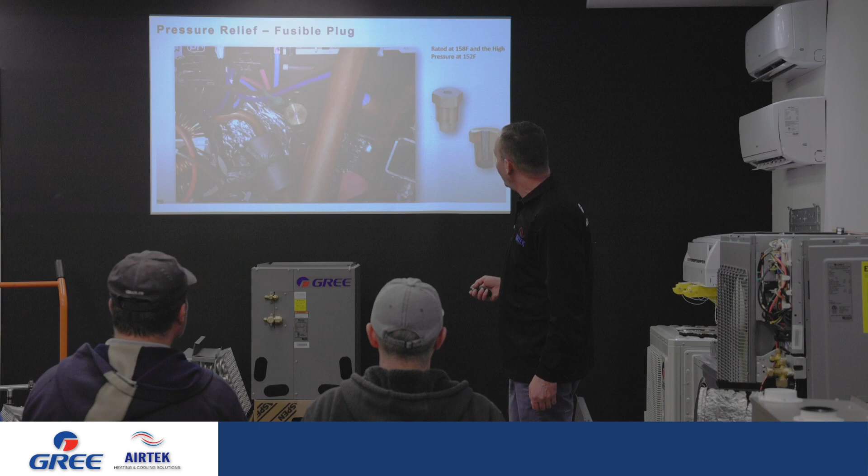What we'll do is we'll take a little break and then we'll finish her up. We're going to get into common fault codes, okay? And I'll show you how to test the compressor as well. Also on a leak, on an E3 code, I've had arguments before, and believe it or not, the customer's right, they didn't have a leak, so we're going to get into detail on how to test the low pressure switch, so we either find out if you have a leak or not. Okay, we'll give it 5 minutes and we'll come back and we'll do that.

Don't be here too long, guys.

While everybody checks back, I'm just going to do a quick video about the compressor. It's too much information for me. I'm an installer serviceman, so I'm only concerned about where I need to test it. But if you want to know a little about how the compressor works, by all means, here we go.

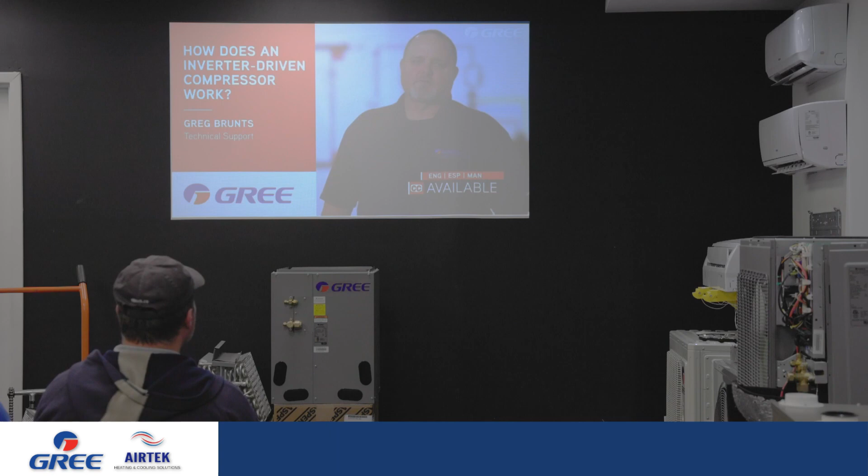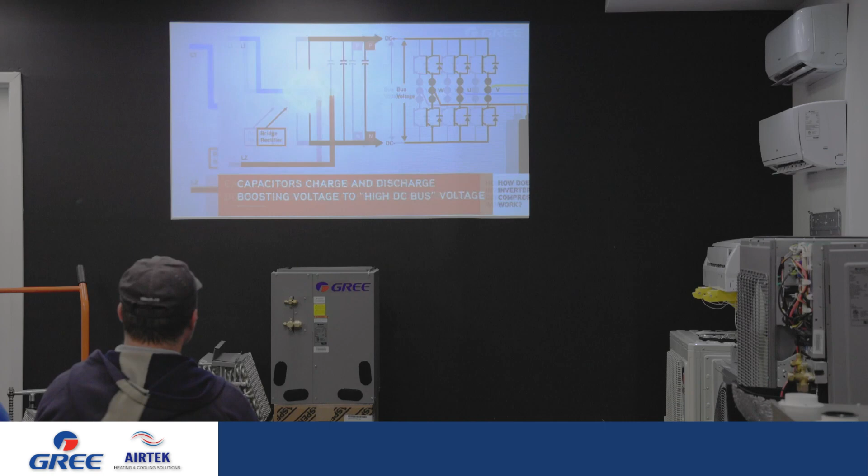Hello, Greg Brunts with Gree. How does an inverter-driven compressor work? The diagram shown here helps give a simple explanation to that very question. High voltage powers a bridge rectifier that forces alternating current to flow in one direction, creating DC voltage. Then the capacitors on the inverter charge and discharge, boosting the voltage, referred to as high DC bus voltage. This high DC bus voltage can be measured in any inverter.

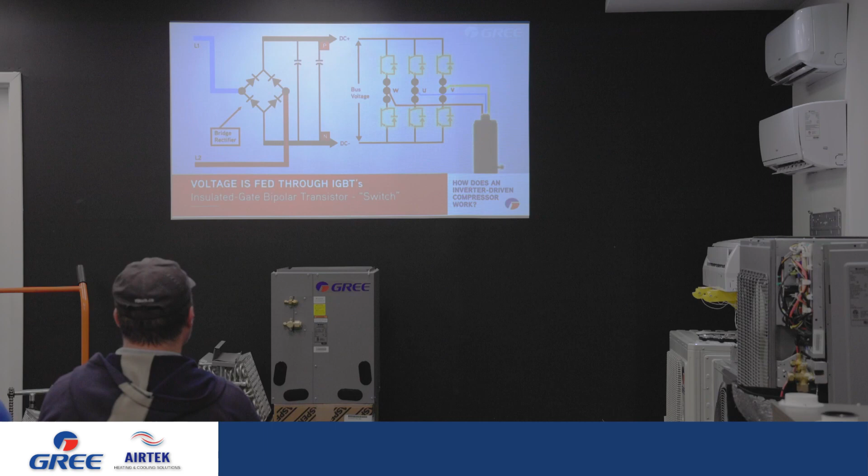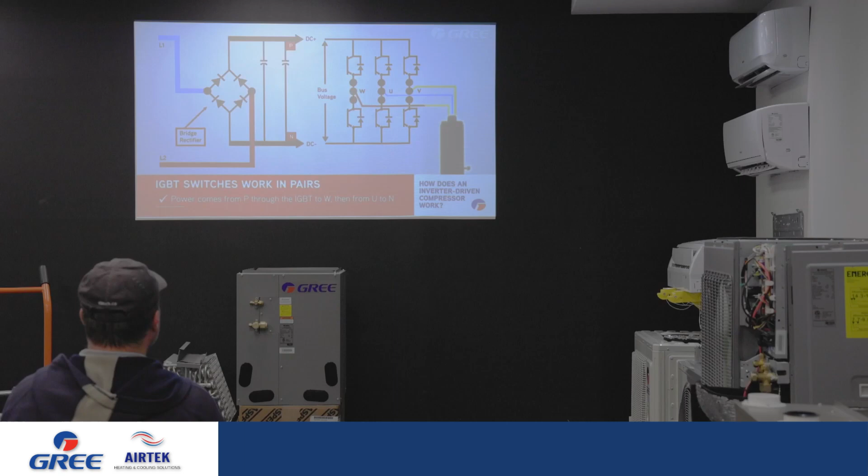From the DC bus, the voltage is fed through heat sinks and insulated gate bipolar transistors. The voltage passes through the IGBT to the compressor winding terminals W, U, and V. The IGBT switches work in pairs. For example, power comes from P through the IGBT to the compressor wire W and completes the circuit flowing through the compressor winding to U, through the diode to N. At the end of that switch cycle, the power comes from N through the IGBT to U, completes the circuit through the compressor winding to V, through the diode to P.

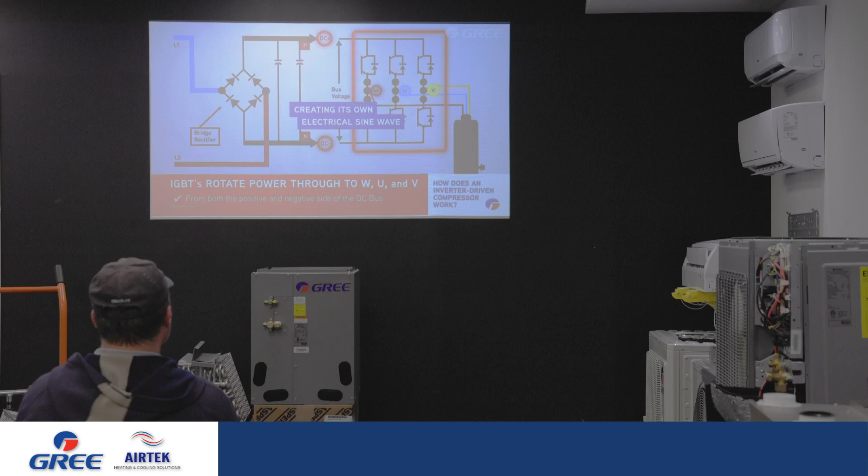The IGBT will rotate the power to W, U, and V from both the positive and the negative side of the DC bus, effectively creating and controlling its own electrical sine wave. The speed at which this happens is the hertz, allowing the main board to control the speed at which the compressor runs. This is what makes the compressor variable speed. The speed is determined by the main board programming and input from the thermistors, pressure sensors, and other components within the system.

My whole thing there is you saw the terminals for the U, V, and W. That's all. I'll pass it around again, but that's all I'll get you to check on the compressor if I ever have you on the telephone, okay?

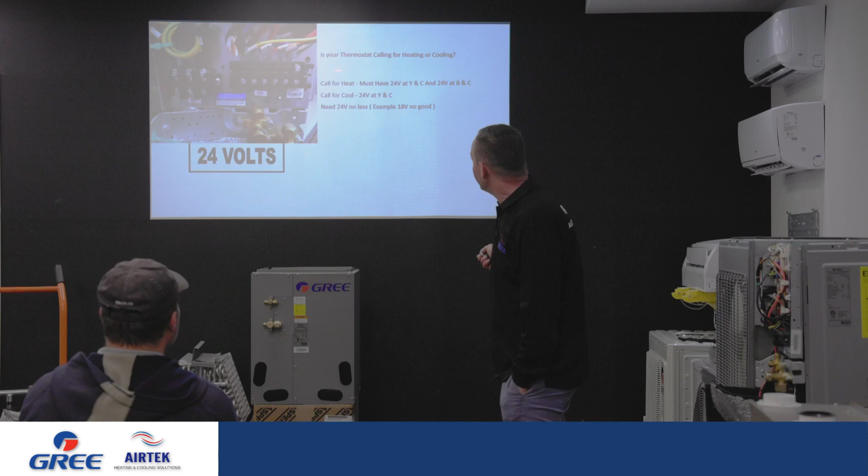Here, this is a big one. So when you call me during the day, I'm always available. I try to be at night as much as possible. I'm going to say call me, don't text me. Better chance you get a hold of me, especially if I am on my bike and it's after hours.

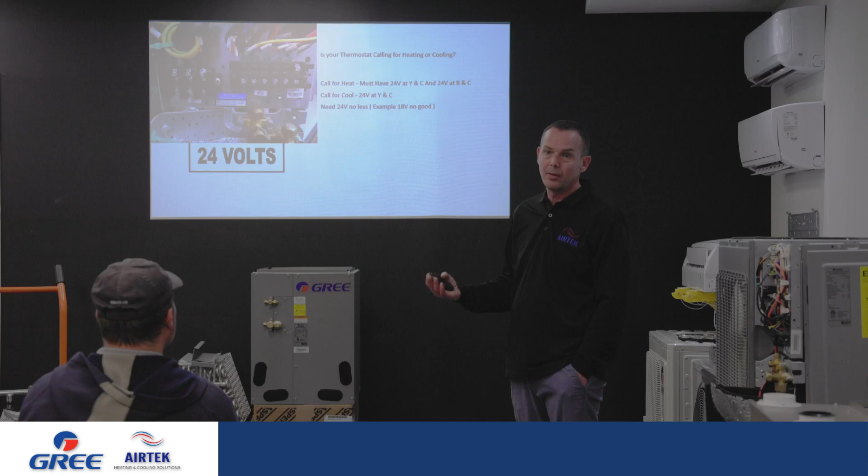Generally on the guy's first install, this happens. The reason I say do this is, if I have time, I'm gonna help you with the thermostat, but I may not, so I might redirect you to Ecobee, okay? So to determine if it's a Gree problem or a thermostat or a wiring issue right off the hop, I'm gonna ask that you check your call for heat. At this time of the year, it's in heating, we're turning it on.

So I'm gonna ask you to turn the thermostat to heat, run outside, check your terminal here, tell me if you've got 24 volts at Y and C. Tell me if you've got 24 volts at B and C. If you do, then that's a real call for heat. And at that point, if there was a problem with the unit, we generally see a fault code. Okay, but that's the point where I take over and can help you, okay?

But you need to have a proper call for heat is what I'm trying to get at, okay? Or a proper call for cool. So what's nice is cool, I only need to see 24 volts at Y and C, meaning we can install this unit for cooling only with just 2 wires, okay? But 24 volts, I really mean 24 volts, so it's gotta be 24 volts or more. You'll generally see 24 to 27 volts.

If you had 18 volts, or a guy was telling me 11 volts, you've got a wiring problem, maybe you have a broken wire. I can't assume, but there's a problem with your wiring. I need a real 24 volts at Y and C if the unit's in cool, or a real 24 volts at Y and C and B and C. Can you force it from here or you have to set?

So I can do forced operation, but this is at the point where you're installing the unit, you want it to work and you want to leave, right? So you've put the unit on for heat and you're saying, shit, it's not working. So before I can help you, I want to know, have you done it properly? A lot of people have problems with their first Ecobee setup. It just is a common thing, right? So that's why I'm saying, make sure you have this.

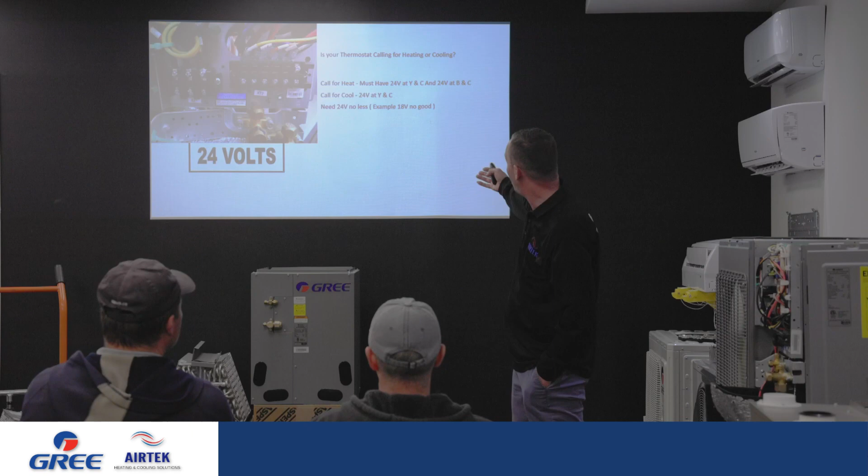But yeah, you could do forced operation without the thermostat by going through these buttons. But if you want to leave the house and give them operation, no, right? So all I'm saying is before you call me, please make sure you have the right voltage. Okay, so you have a call for heat, there you go. You have a call for cooling, there you go. Under 24 volts, there's a problem.

If there was a problem with this, the customer's going to tell you, it'd be the winter time most, and they're going to say, well, it's lukewarm air. So instead of getting the 100 degrees Fahrenheit we talked about, they might be getting 75 or less. So they're going to notice a difference. It's going to be warm, but it's not going to be warm enough. I generally hear the term lukewarm. Okay, so that'll be the symptom of this.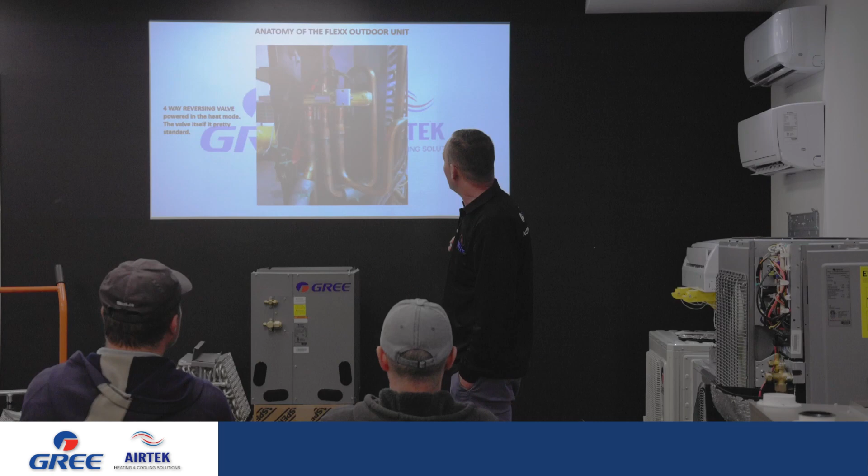So to check, it's really easy. It's not rocket science at all. We're going to put the unit in heat. We're going to take the top off so we can access this. You need a magnetic screwdriver or something magnetic, a well-insulated magnetic screwdriver would be my suggestion. You're going to put the screwdriver on the top right here. You're just going to touch it to the top of the solenoid, okay? If it magnetizes, it's good.

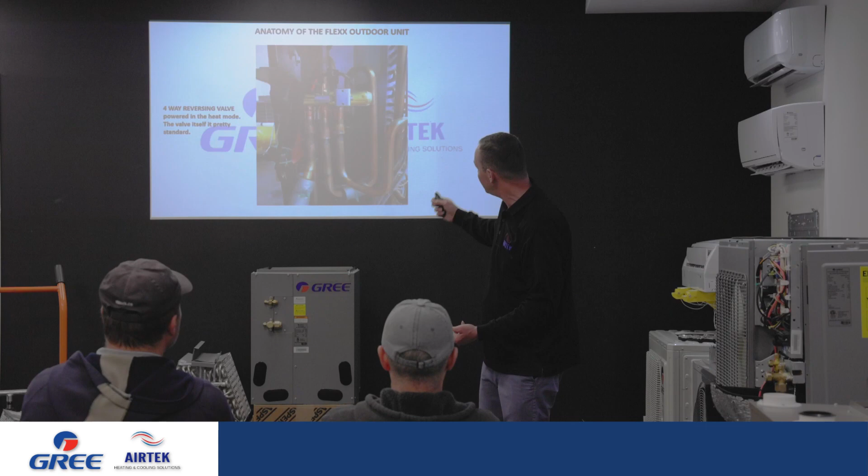To further check, you can unscrew it, and you'll feel it get warm in your hand, and you'll feel it humming in your hand. That's a sign of a good working solenoid, okay? If it wasn't humming, if it wasn't getting warm, if it didn't magnetize, that's our problem. Okay, that's really it for troubleshooting this thing, so it either works or it doesn't. To change it, it's not hard at all. Again, I've never had to change one. I had a guy fool me, probably 9 months ago. He didn't wire his thermostat properly.

That's why I go over the voltages we need at the thermostat. So I thought it was this, and I brought one of these with me. Anyway, it wasn't. It was his wiring. Okay? However, one screw, and I think it's 3 or 4 tie wraps. You cut it, and it comes into, just so I'm not lying here, the purple wire connects to the board right there, so it's a real easy fix if we had that problem. Again, I never have had it before, but everybody seems to ask when they're calling, oh, is the reversing valve working? We haven't had a problem with it, but that's how you fix it.

Okay, so the customer's going to say, hey, my air is lukewarm. At which point it's a really easy task. We go and make sure it magnetizes. Magnetizes, it's good. If it doesn't magnetize, you can come on in here and we'll have one for you. We've got a box that's going to last us 10 years or more.

Okay? All right, this is, I don't know, one of the most common anyway. We're going through all the common fault codes. So E3 is a very common fault code I get. And I've been to jobs, my boss sends me with a bigger customer, and he says, the guy said we sold him a piece of crap and it's leaking. I go there and it's not my unit. The guy's got a leak here, or on the outdoor unit it's flare. Okay, and it happens, it could happen to anybody, nobody's mad about it. We treat it as a learning experience for everyone, okay?

But I had one call and it drove me crazy. I had this guy and he was an arrogant SOB. He was Mr. Perfect. And he says, I don't have leaks. I don't have a leak. And I've checked and I don't have a leak. And I said, well, why does it say E3, man? You've got a leak. So we battled at it. It took 2 days to resolve this issue. So we argued and argued enough. I even gave him a control board. And I'll get into that shortly what happened with that. That was an awesome experience too. He's still telling me he doesn't have a leak day 2 now.

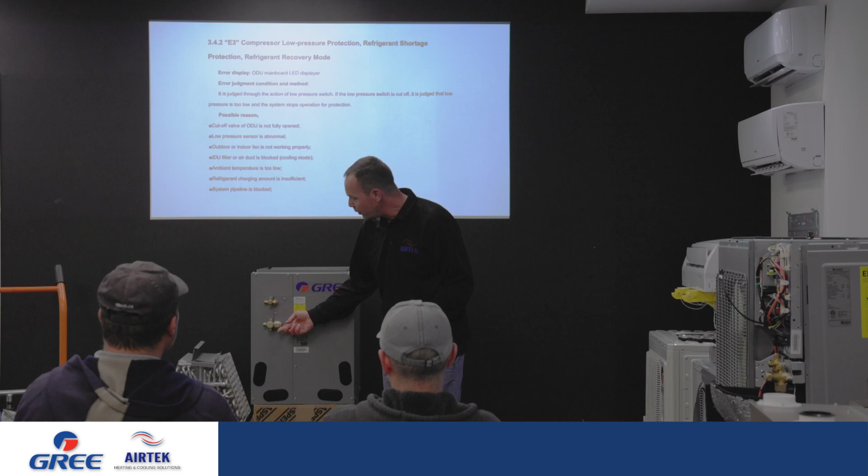I remember old carrier units where I used to need a pipe wrench or adjustable wrench to crack the valve. I love yellow jacket, but I don't think that tool is great for us to use. A real Allen key set won't damage anything. I've seen so much damage at other places in my 25-plus years doing this. When a guy comes back with a valve problem, I know he didn't put heat paste on it. Here we don't have to worry about that because it's flares, but I've seen a lot of things.

I'm assuming you'd check before calling, but the outdoor fan not working properly, meaning it isn't moving enough air, could be another cause of E3. Maybe we're getting ice buildup. These are all the common air conditioning issues, but ultimately, since it's new to you, don't forget to check here.

Refrigerant insufficient - I haven't had anybody call me with that yet. Generally he's got a leak. But it could be that you don't have enough gas, maybe it's a 40-foot line set and you didn't add gas. Again, you can call us, we will help you.

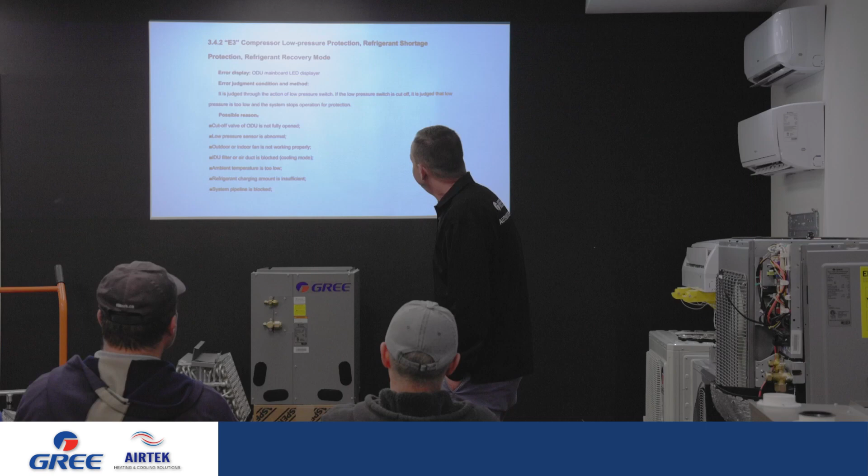Pipeline blocked - then we're in really big trouble. It sounds like you were welding and didn't know what you were doing, and contaminated the system. That's scary if we end up with a blockage in this case. Remember, it's not an open loop, so we can't just blow all the contaminants out. We really have to be careful when installing this. Personally, I don't think welding is a good idea at all.

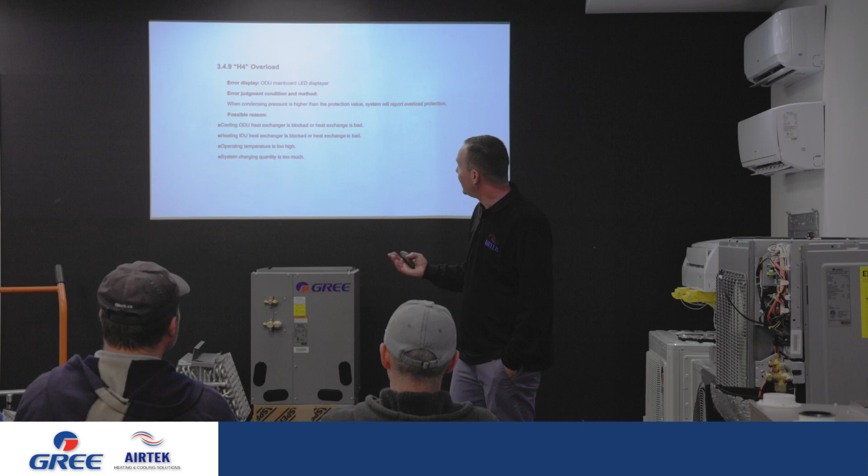H4 overload - this is the most common call. It ties into the line set size. This is how we determine you need the 15-foot line set, and why you pull 5 ounces out even if the line set's 15 feet. Even at 20 feet, I know it's a small amount, but I would pull out 2 ounces. I know it's piss-all, but knowing what I know, I'd really take 2 ounces out on 20 feet.

15 feet minimum, and the reason is noise. When entering the building with the pipe, I'd like to see an inch or two-inch hole, open space around the pipe. I don't want it touching wood or brick. It should be a wide open hole.

When strapping the pipe inside, this is a big one. Instead of strapping tight to the joist like we used to with an air conditioner, remember when this goes into defrost there's a lot of different vibrations. So it's better to use a U-shaped strap, let the pipe sit in the strap, let the strap do its job and hold the pipe instead of forcing it up to the joist. We want it loose, we want the pipe to sit in the hanger.

I had an experience that shows why this is so important. I went to a job where the lady said that whenever she did her dishes, the whole floor would vibrate like crazy. I get there with the guy and we're standing there, we didn't see anything at first. She stood at her kitchen sink and the tile vibrated - holy shit. So we went downstairs and restrapped everything. Also stay away from ductwork with the line set; don't strap it to that because it'll carry noise again. So it's really important: that 15 feet, and watching where and what you're strapping to.

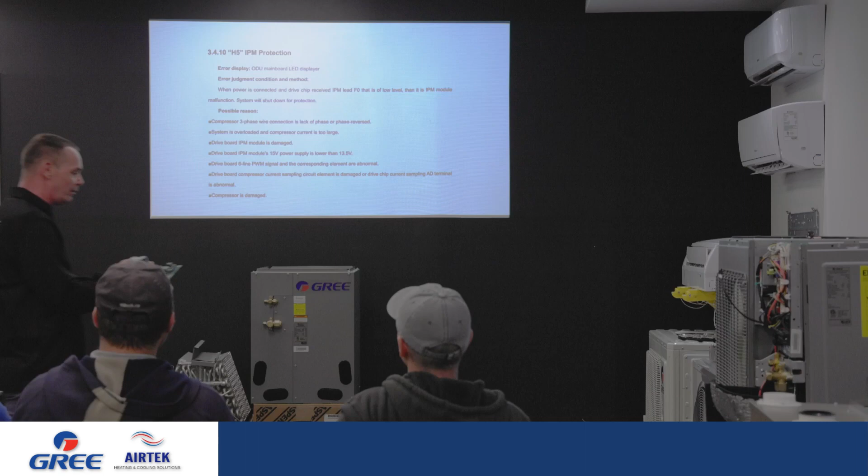Where'd that drive board end up? This guy here, okay, so the drive board. So you get an H5 code, give me a call, or just before you change the drive board, because there's a lot of work involved. We have to put our heat paste on. We have to put 4 screws in, and it's in a tedious spot, okay? We're going to ask you to check the compressor.

You got it, no, measure the wires to the compressor. So we're measuring the compressor. Instead of trying to get to the compressor, we'll do it here. So ultimately, on those 3 wires, no matter how you measure them, you're going to see a 9. If you've got a different value, then there's a problem with the compressor. Call me on that and we'll just confirm, okay? But there'd be a problem with the compressor. So I wouldn't want to give you a drive board to find out that we already know the compressor's damaged.

Okay, so that's something that the book doesn't really tell us properly. So I'd ask that you just check the compressor before you change a drive board, okay?

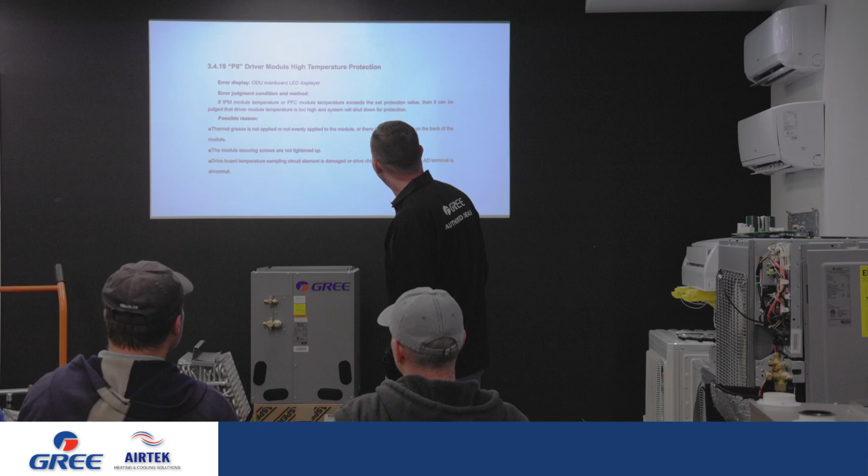This is an awesome one. We got one of these the other day, and I spoke to that guy yesterday. I got to go to his job. So crazy but true, the drive board has to have thermal paste on it.

Generally when you go to change it, if it's new, there's probably already enough on there. Just take a nickel and scrape off the excess, and you'll see when you pull this off where the paste is. If you're ever looking for paste, our replacement boards used to come with heat paste, they don't now.

I'd encourage you, not just for my unit, but the Midea units, we've got it badged as the ATK, Carrier uses it. It really is a ductless unit converted to a heat pump. The board's on the top, if you've seen it before, and it's got the little sideboard with the readout digits. Anyway, that one requires a whole tube of heat paste. This is minimal in relation to that, but what I'm saying is we should have it because all heat pumps require heat paste now, not just heat pumps, ductless units.

Either way, you get heat paste at, believe it or not, Business Depot, Staples, or Best Buy. Home Depot is the first place we looked. We couldn't find it, so we had to go to electronics places, and that's for computer boards, right? That's what it is ultimately. I think it's under $15 a tube, but great idea to pick one up.

You never know. So P8, you're going to see when you change this board and you don't put any thermal paste. Okay, there's also 4 screws, 1, 2, 3, 4. They're a pain in the rear to put in, but if you don't tighten them all the way, or if one drops, you're going to get P8.

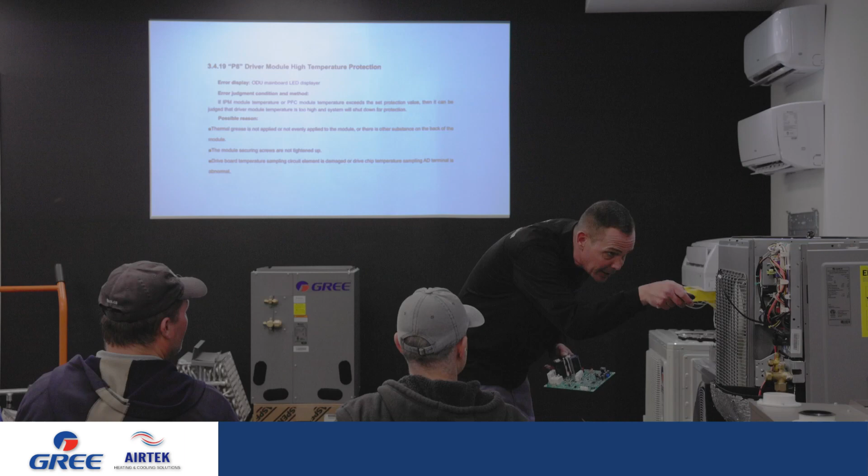Before you leave, have a look here. I think I said it earlier, but there's a heat sink in here that's probably 6 by 4. So this is a heat sink here. This is to relieve heat. 6 by 4 is a very large heat sink, and it's in the fan compartment, so it tells you how hot this is getting.

Okay, so when you see P8, chances are not enough heat paste, or there's a screw that's not tight enough. Worst case scenario, the board itself is bad, but it's pretty unlikely. It probably happened, it probably burned up, and that's why it went bad again.

So heat paste, you only want to do this once. What I will say as well is in changing these boards, we don't always give you the case. For example, there's no case on this, so save yourself the time. I wouldn't take the screws from the case out. I would take the screws off the board itself. Otherwise, you're doing double the work.

You'll see in the place where this is before you leave, have a look, and you'll say, well, holy shit, you want it to be as easy as possible. And when I did change it, I was wearing this, not this shirt, but a shirt exactly like this, and I had white paste all up and down my arms, so be prepared for that too. It was a first day shirt, thankfully it was one of their shirts, and I was able to get another one. But keep that in mind.

So thermal grease, thermal paste, pick up some.

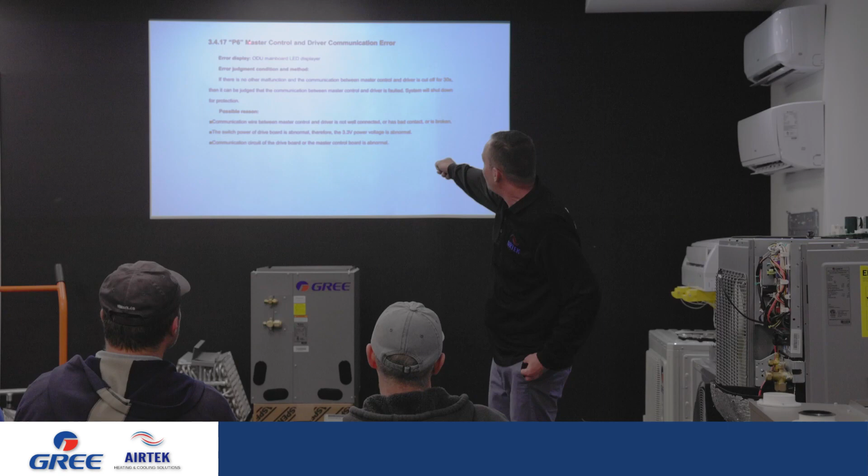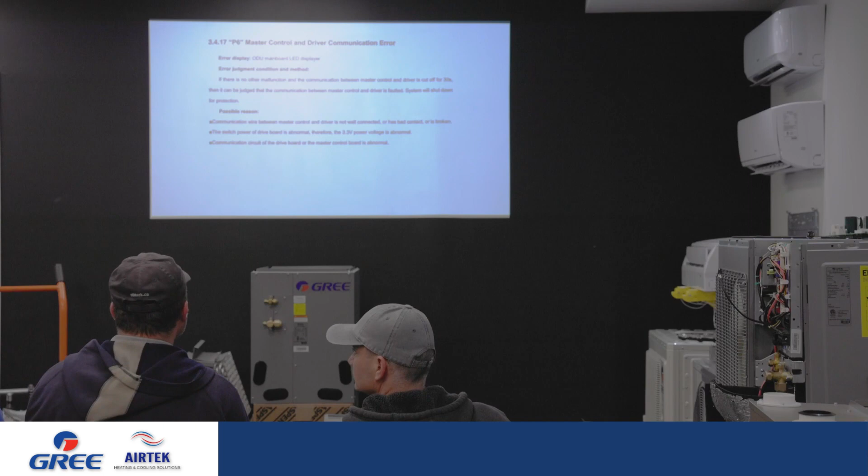P6, this is rare. I did see this on a customer, had a new unit and he got this, and for whatever reason he didn't call me and they pulled the unit. So I talked to him and said we could have fixed that. So what the problem was is the main control and the drive board was an issue between the two communicating. Chances are it's that little connector board. I've seen that happen as well. Generally, right, very possible to be the connector board.

In this case, if we have this problem, what I would do is give you three boards, we don't want to waste your time, so I'd ultimately give you the connector board, the drive board, and the main board. I'd ask you to try this one first. If it didn't work, then you'd have to make the effort and do the main board and the drive board.

But before you jump the gun there, remember this unit came from China in a container. Who knows if it rolled around when it was in the water, what happened? I'd love to put a camera in and see what happens from here to there. Just go through all the terminals on the main board. You'll have to take the top off of the drive board as well, but just make sure everything's nice and snug, nothing came loose.

It's possible. I did get a call months ago with the same error and we were able to fix it. I drove all the way out there, and went like that, the problem was solved. So try loose connections first. Worst case, give me a call. And again, we have parts, I've got more parts, the parts are going to last my whole lifetime. We're not moving parts at all here.

This Mr. Perfect got this one. So Mr. Perfect insisted I give him a board, and at this point I take a board, no problem. So I give him a board. He didn't change it, he didn't know, so it's not his fault, but it was awesome anyway.

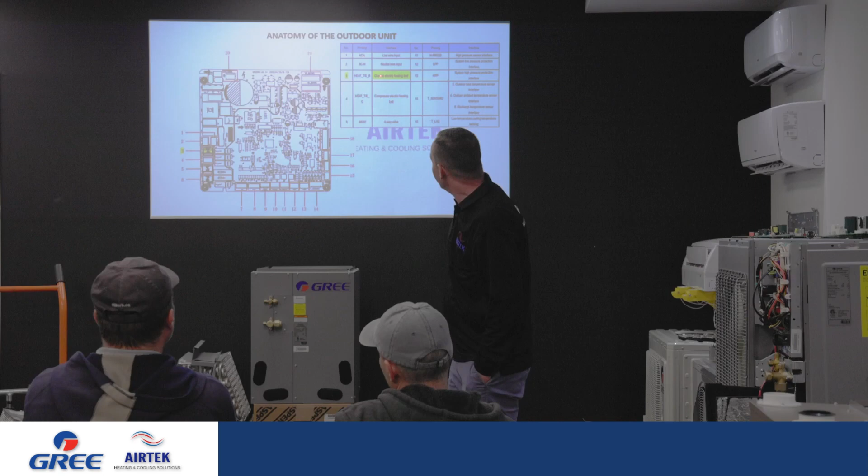Labeled really nicely, chassis electric heating belt, so we know what it is. There's no value to this, it's just a wire, so we're just going to ohm it out. The only thing it could be is a break somewhere on the wire. Very unlikely, but that's the only thing it could be. So we're either going to get a 0 or we're not going to get a 0 when we ohm it out. You could even use the beep setting, it's such a small wire. If it beeps, it's good. If it doesn't beep, there's a problem with it.

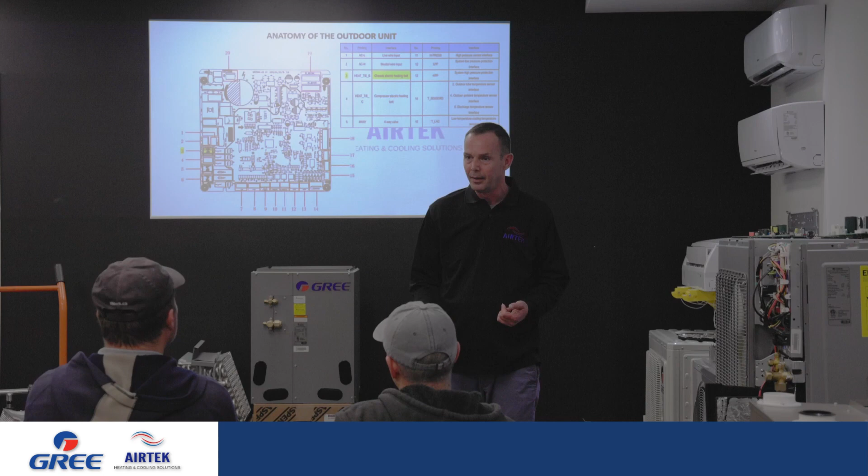Do we have these in stock? I assume we do. I've never had to change one. That wire, I've never seen one fail, but do we have this part in stock? We actually ripped them off a bunch of units, remember? Okay, there you go, so we do have those in stock.

When we say that, it's awesome. We were using a trucking company, and I got pictures of units falling off trucks. When units fell off trucks, we didn't want to resell them to you, so until we got parts, we were just taking parts off them. The first couple months, that's how we got our parts. We didn't need them, but now we've got cases and cases and crates of them.

Okay, as I say, call me in the summertime if it's after hours, even when I'm riding my bike. We try to answer. I can't promise Saturday and Sunday. I tell my boss, listen, Lennox, all these major brands, they all close at 5, 6 o'clock, and they all go home on the weekend, even their tech team. So I do try to answer. We want you to succeed. There's myself and Sauger that get the calls, so we generally will pick up. Texting I may not see because I ride my bike an awful lot.

To be honest, one of the first calls I got, I couldn't find anything in my service manual. So I went on YouTube. I don't know what language the video was in, but it pertained to the issue, and I was able to help the customer by doing that. So you never know what you're gonna find on YouTube, but it really has its own little Comfort place there. It's pretty cool. And they update it regularly.